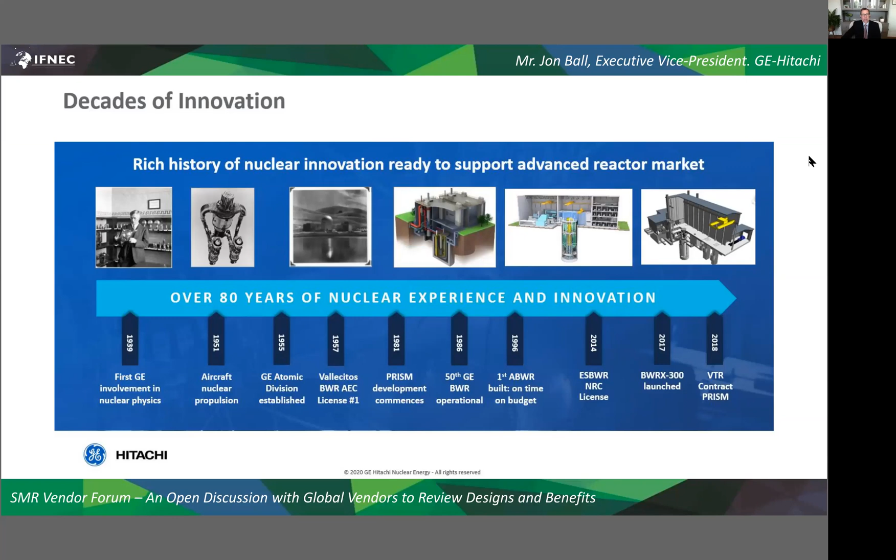Next page, please. So I think many of us on this call can agree that new nuclear is going to be absolutely essential to achieving a world that values decarbonization. More than 60 countries to date have established net zero targets by the year 2050. But the reality is that for nuclear to be relevant going forward, it's an absolute imperative that it become cost competitive. There's been a number of reports recently.

Catapult Energy Systems just last week out of the UK published a report stating that cost reduction is a necessary prerequisite for the future of nuclear. EPRI and MIT have published detailed reports on the same topic. Go to the next page, please.

So it's really out of that spirit of driving cost competitive nuclear that our SMR was born, the BWRX-300. We've established a very rigorous design-to-cost approach, setting aggressive targets to be competitive with all forms of generation, including gas, and really driving for a significant capital cost reduction.

Now, the X300 is our 10th generation boiling water reactor. That's what the X stands for. We've scaled it from our ESBWR design, which is licensed by the US NRC, still maintaining world-class safety. The benefits of smaller reactors like the X300 are their flexibility, the ability to load follow - we've done modeling and it has that capability. Besides providing electricity generation, it's ideal for other industrial applications like desalination and district heating. We've had a lot of focus on constructability, which is key to reducing the overall cost of new nuclear. We've established, and I'll talk more about, licensing in both the US and Canada, with a path towards being operational by the year 2027.

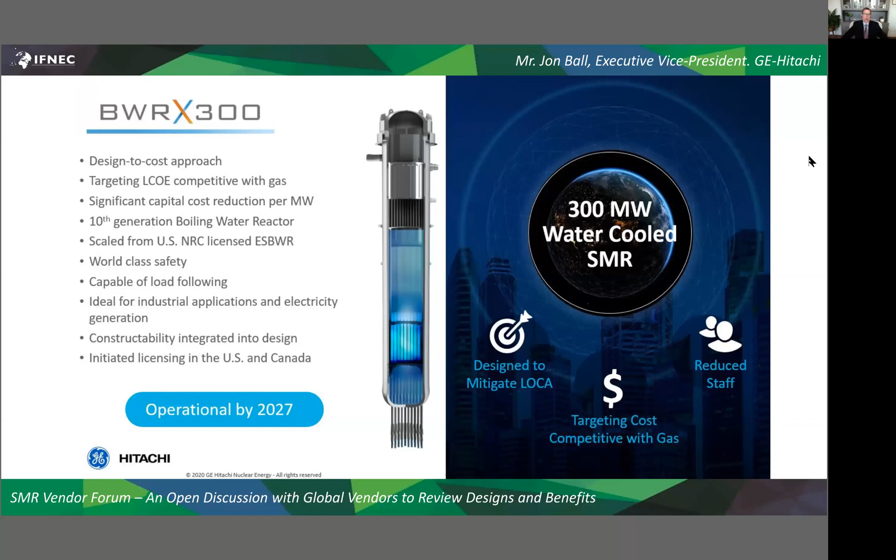So we have these massive safety systems in the event of an accident that we've never experienced. Our engineers figured out a way to eliminate or mitigate the possibility of a large break LOCA. So we were able to eliminate all of those systems and the massive structure that goes with them, reducing the volume of this reactor by 90%, while still maintaining 20% of the output. We get tremendous leverage - more than 50% reduction in building volume, in concrete and steel, on a per megawatt basis.

And we're in the process of licensing this concept. We've submitted an LTR to the NRC, it's going through review, and we anticipate it will be approved in the July timeframe, just next month. Next page, please. So we have these new innovations that have enabled us to simplify the reactor.

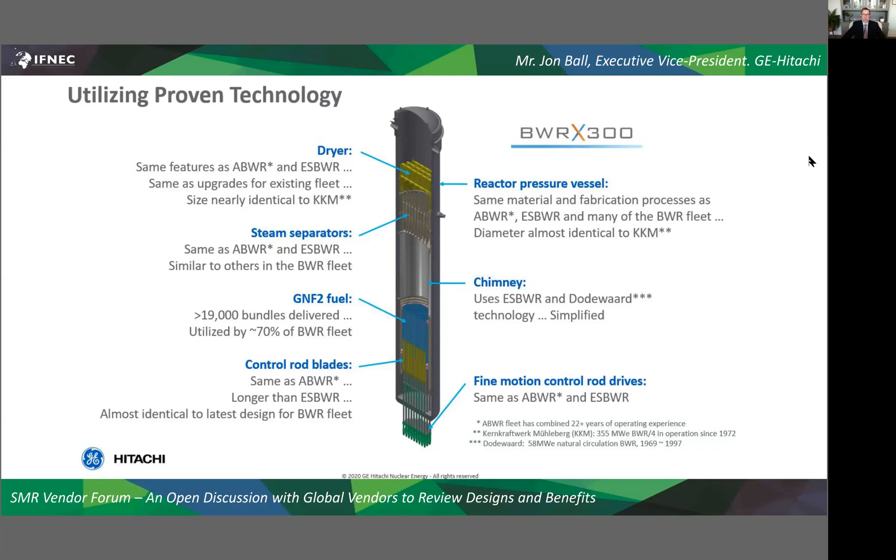In addition, this design leverages existing fuel. It's been optimized on GNF2 fuel, which is operating in 70% of the boiling water reactor fleet today. This enables us to bring this technology to market very rapidly. Our experience is it can take up to a decade to design, license, and deploy new fuel designs. Next page, please.

We have line of sight for this design to be very cost competitive from an nth-of-a-kind perspective. This is a plot of the levelized cost of electricity versus the overnight capital cost for a new reactor. Conventional large light water reactor is very expensive. You can see where the X300 is positioned, $1 billion or less, and somewhere in the 40s dollars on a per megawatt hour basis.

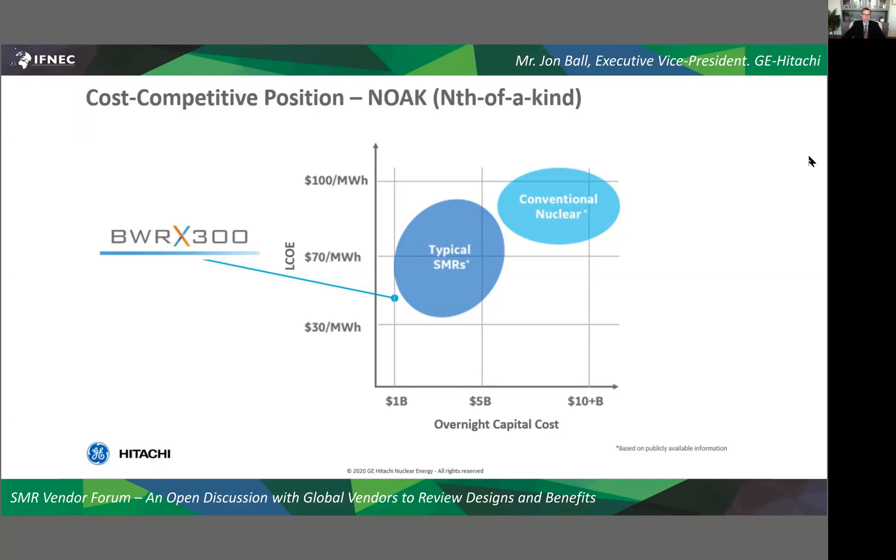Next page, please. We have initiated licensing, as I mentioned, both in Canada and the US. In Canada, we've just started the vendor design review, which is a combined phase 1 and 2 approach. In the US, we've started and we plan on a Part 50 approach, leveraging the ES-BWR design. I mentioned this is already licensed by the NRC. So what we need to do is simply submit licensing topical reports that describe the key differences from ES-BWR going to the X300.

We've started that process. We have a handful of these LTRs. So another example of the ability to really accelerate this technology to market by leveraging ES-BWR. And we target commercial operation by 2027 in the US and 2028 in Canada. Next page, please.

We believe that the US and Canada are going to be first movers, but the rest of the world - and these are just a few examples - we've been in discussions with a number of other companies and countries interested in this technology. We have an MOU with the CEZ Group out of Czech Republic, Synthos out of Poland. This represents a very interesting new customer base. Synthos is a large chemical manufacturer. We believe that the customers in the future for SMRs are not going to be just utilities, but also the industrials, and Synthos represents a great example of that.

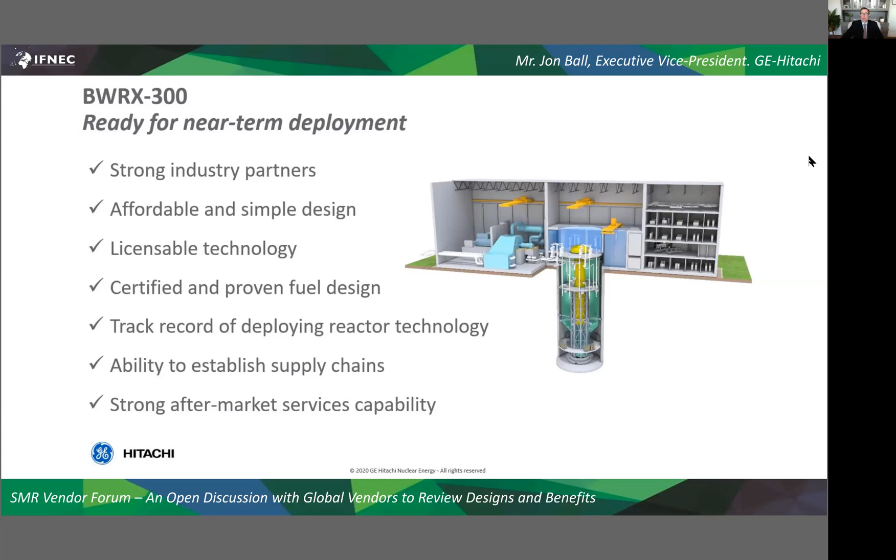Wherever we go around the world, we understand that localized supply chains are critical, and we've done that not only in nuclear, but across the entire GE portfolio. And then the ability to service these reactors once they are online - this is really key in terms of continuing to reduce the operating cost by optimizing outages and those aftermarket areas of support that are so critical. So with that, I want to thank you for the opportunity to be here, and I'm very optimistic about the future of SMRs. Thank you.

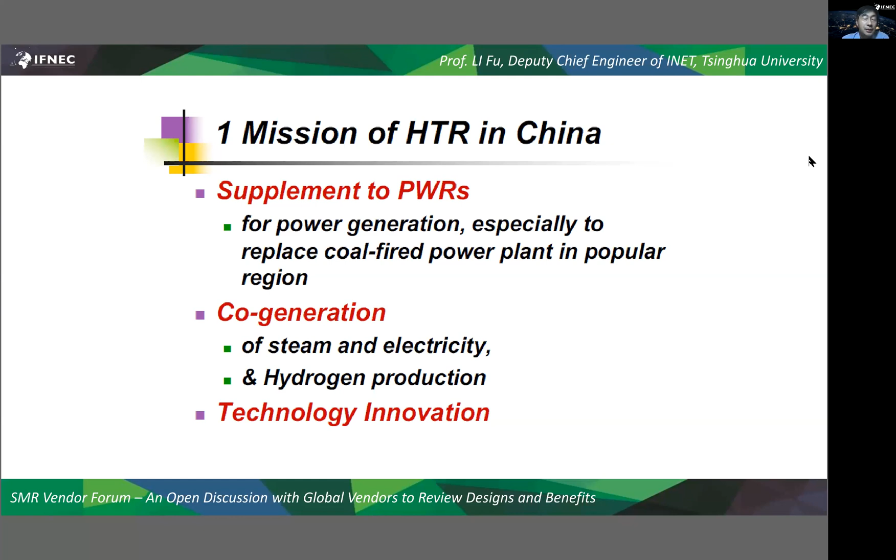In China, we think HTR is very important. It will be a supplement to electric generation for PWR. Its main role is cogeneration, to produce high temperature steam, and maybe in the future for hydrogen production. As an innovative technology, the government will support the commercial development of the project.

In China, we started research on HTR in the 1970s. In the 1980s, we started the test reactor HTR-10, and it finished in 2000. After that, we decided we must build a commercial plant, the HTR-PM.

The HTR-PM started construction in 2012, and we hope next year it will reach grid connection quality. After that, we want to build a larger one—the reactor itself is the same, but each unit will have more modules. A module of the reactor is our aim and our plan. We chose pebble bed, and I think our project also benefits from international cooperation.

For the HTR-PM, it's now under construction in Shandong province. This is Beijing, and it's around 1,000 kilometers from Beijing—that's the site, in Shandong province.

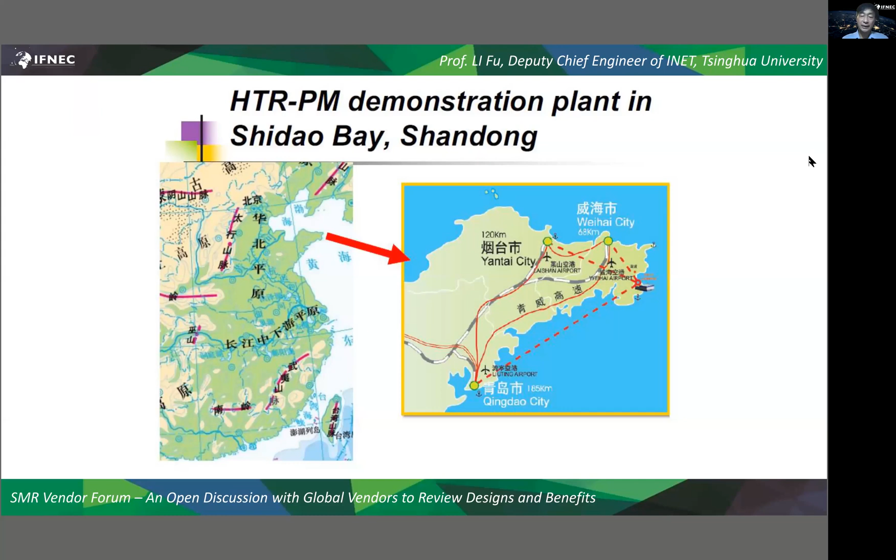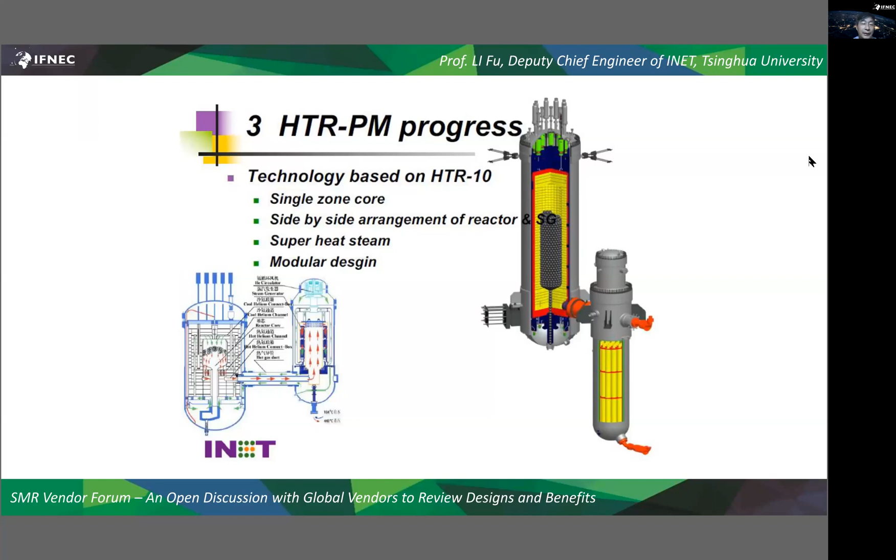A special design feature of HTR-PM is that we have 2 reactors, 2 steam generators, and the steam comes to 1 turbine. In the future, for this configuration, we want to connect 1 steam turbine with 6 reactor modules and 6 steam generators. This way we can keep the main components and steam system, but produce a larger plant with much better economic features—this is our idea.

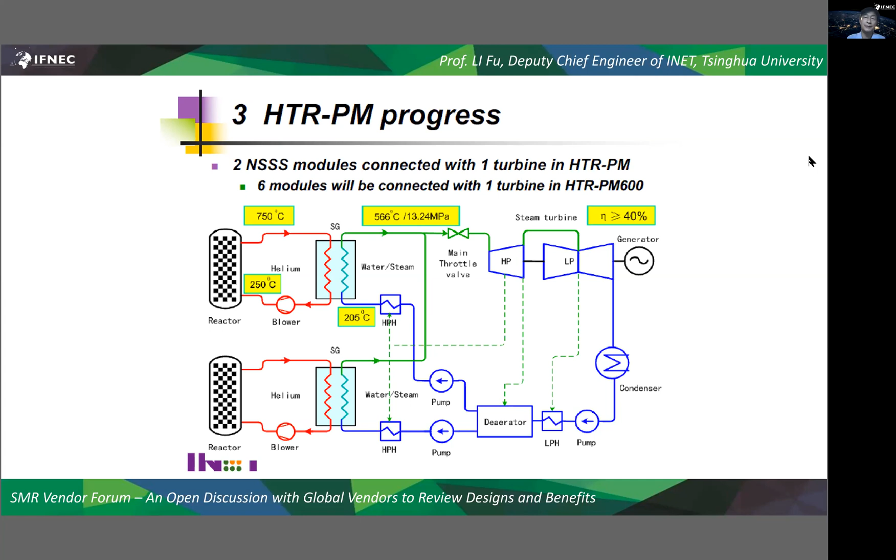Therefore, we will test the coupling between 2 modules in 1 unit in HTR-PM. This will be our idea.

For HTR-PM, we have 2 reactors, each producing 250 megawatts thermal power, and the turbine will produce 200 megawatts, with efficiency around 42%. The steam temperature is around 570 degrees, so we can use a commercial steam turbine with very high efficiency. The helium temperature is around 750 degrees, enough for superheated steam as well. In the future, if we want to produce hydrogen, we can increase the temperature further.

For the project, construction started at the end of 2012. This year, all the installation is nearly finished. The reactor pressure vessel, the hot gas duct vessel, and the steam generator vessel are fixed together. This has taken about 6 to 8 years of installation and construction.

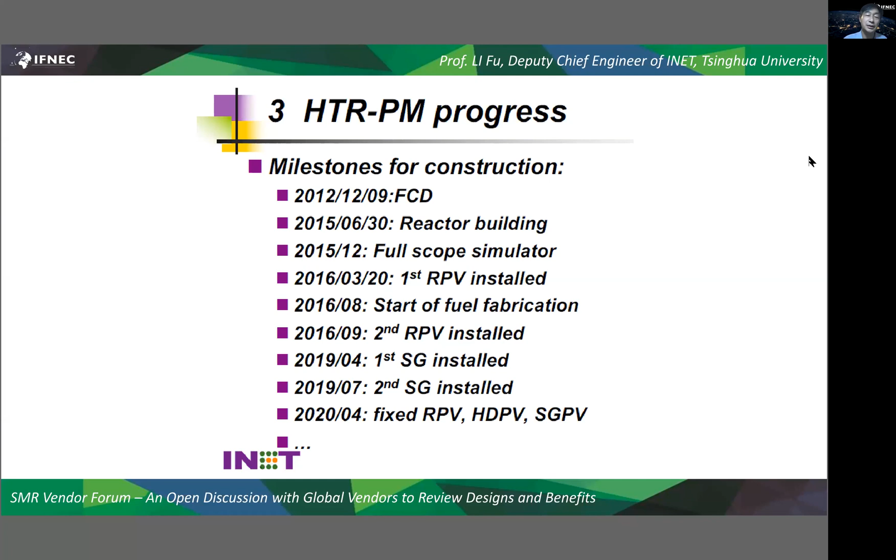It's a first-of-a-kind project, so we encountered many technical issues. In the next project, the construction period is arranged for about 40 months, much shorter than this demonstration plant.

This year, the commissioning test has started, and criticality and power operation are scheduled for next year.

From the project report, I think the main achievement is that we tested the standard nuclear steam supply system modules at full scale, which will be demonstrated in later operation. Our team also gained experience from design, manufacture, licensing, construction, installation, commissioning test, and operation. It's very important to note that the licensing framework for this new type of reactor has gained full experience, and the licensing authority in China is now familiar with this project. Up to now, no technical issue remains outstanding—the remaining work is just to provide experimental data for all the components, which is also important.

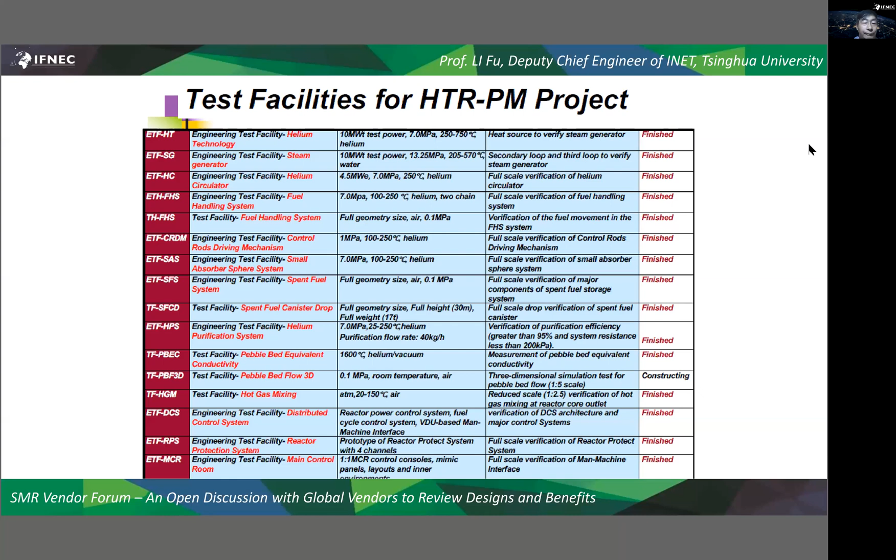All the components were tested. And also for the supply chain, we have very big utility companies, and they are willing to be next utility company. All the main components mostly come from China, from Shanghai Electric for example, and also the graphite comes from a Japan company, Toyo Tanso. And also for the fuel, for the components, for the instrumentation and control, all is coming from China. I think all the system, design, manufacture, construction, and supply chain is available in China and some from worldwide.

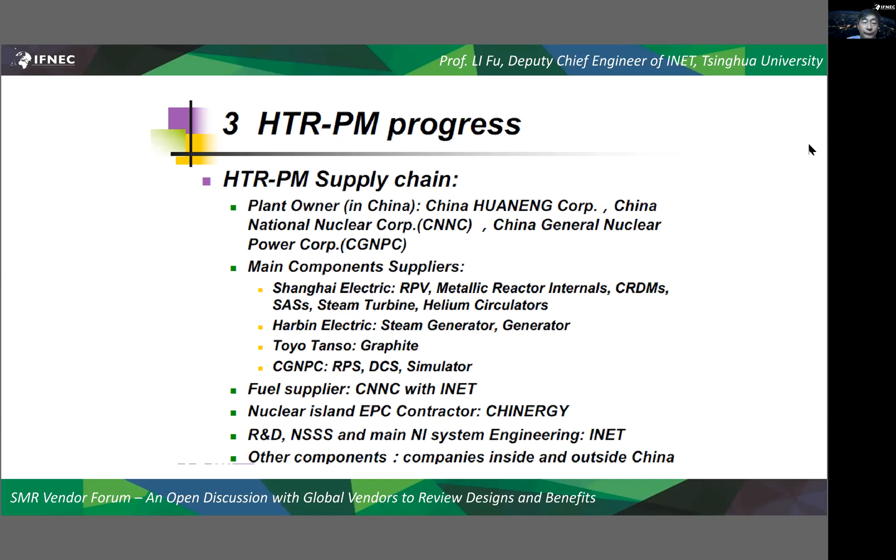After the HTR-PM, I think batch construction of HTR-PM is available. And also we designed a new version, the HTR-PM 600. There are 6 modules instead of 2 modules in the demonstration plant. But all the components are the same, just larger size and better economical. We hope in this way it can compete with other types of nuclear power plant. It can also help to produce steam, which is very important for the market.

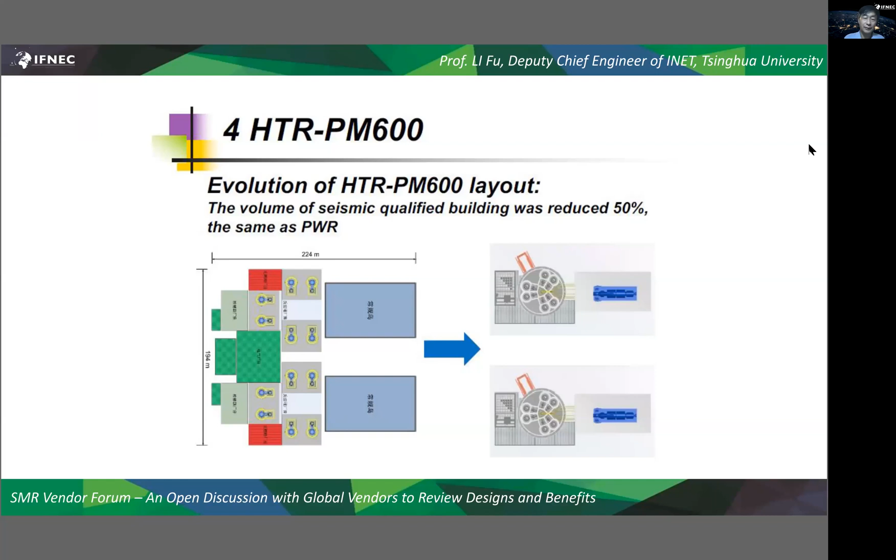This is the reactor building hosting 6 reactors, 6 steam generators located side by a steam turbine. And this is the same space and same area as a light water reactor actually.

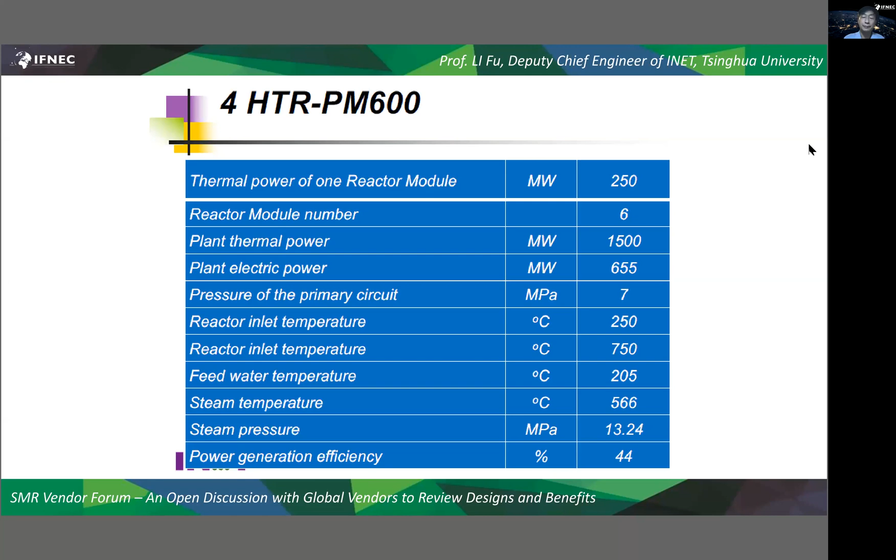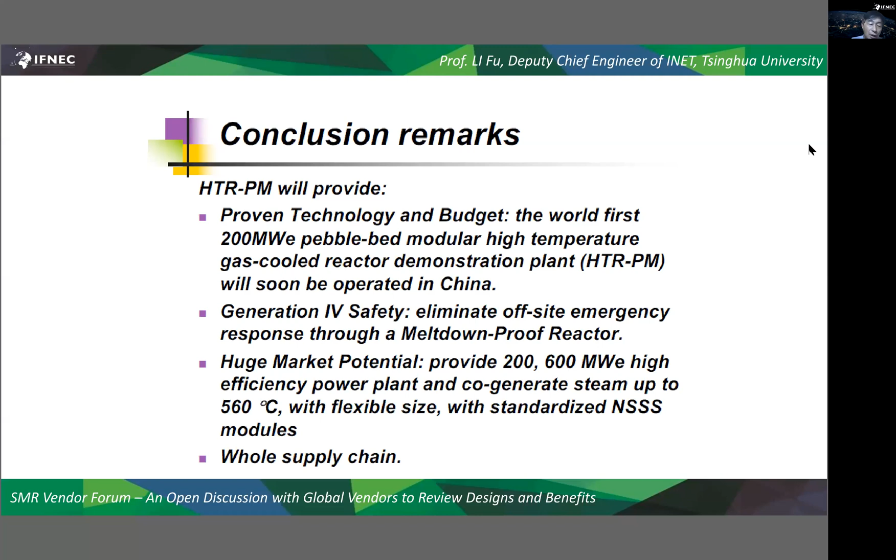I think I can skip this slide, it's a parameter, and I'll conclude. All the parameter is the same. For the HTR project, we can provide a proven technology and the budget of the project. Also the safety feature can meet the Generation 4 category. And also we can provide 200 or 600 of electricity, very flexible, and also steam with temperature around 560 is also available, along with the whole supply chain. Therefore, this is a rare project where all the technology and all the experience is available.

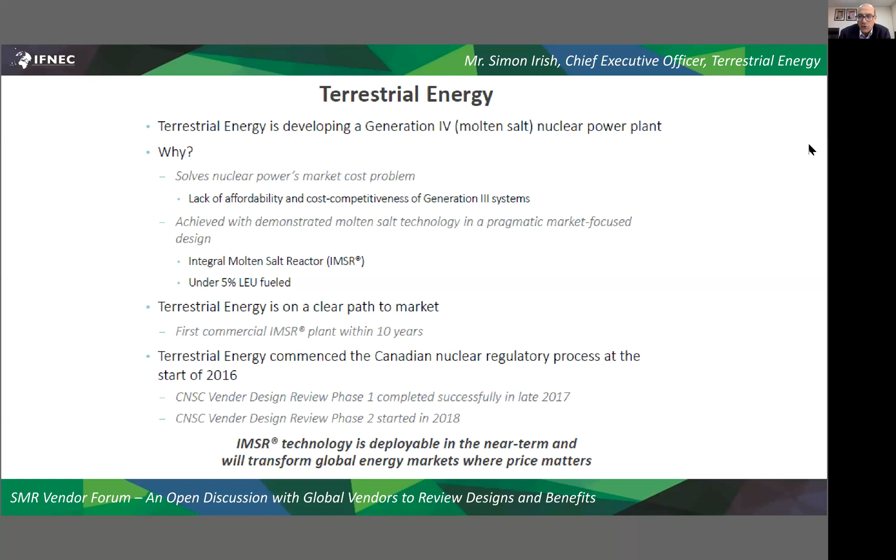Next slide, please. I want to return to the problem statement, the innovation statement. The first three bullet points are self-evident truths recognized by those in the nuclear industry: nuclear energy as an energy source is capable, has always been capable of changing the world, and it will change the world. It's more scalable than fossil fuels, and it's clean.

You have to construct a nuclear power plant, or any infrastructure project, quickly. So, over 10 years to construct, and once you've built it, you can dispatch power at over 10 cents a kilowatt hour. That may be okay for governments doing things not entirely for economic reasons, but that's not acceptable for private capital.

The problem of tens is associated with high complexity. So conventional nuclear new build is too big, too complex, and too costly to build. These, in our opinion, are direct and unavoidable consequences of technology choices. As a company, we formed in 2013 because we believe there's a need to rethink technologies and rethink designs.

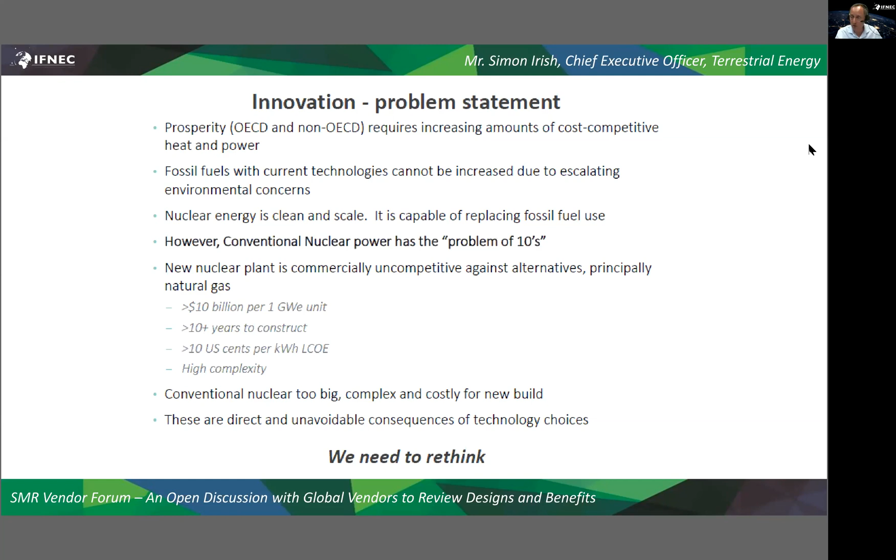These are the cost drivers for Generation 3 small modular reactors, in our opinion. You start off with the cost position of a large conventional reactor and want to make it smaller. You're going the wrong way down an economy of scale, which is ferocious in the nuclear sector, because at every turn, economically, you have fixed costs. Those fixed costs point you always, consistently, to have bigger and bigger systems or deploy more and more of them. That's a negative factor, and it's unavoidable if you wish to have an affordable power plant.

You can, to some extent, offset that by making it modular, assuming broad market deployment. But in our opinion, modularity and mass construction of components in a factory setting is only going to partially offset the diseconomies accrued from making it small. So we don't believe that a small modular reactor using conventional reactor technologies solves the market problem.

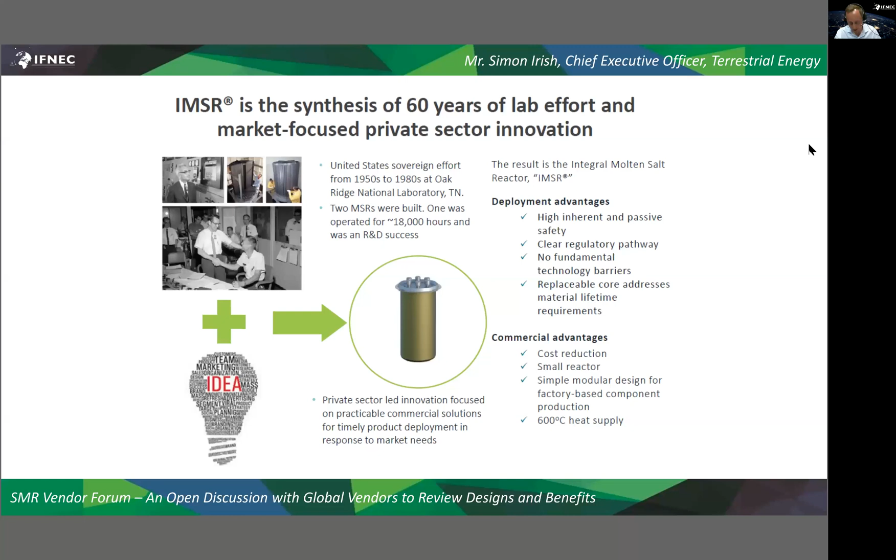Next slide, please. So these are the cost drivers with using a demonstrated molten salt reactor in a pragmatic market-focused design. You'll notice they're more extensive with the generation 4 technology.

The first one I'll talk about in some detail is high temperature. That is the most powerful. The benefit of operating at high temperature is you have a machine that operates at 50% greater thermal efficiency. With 50% greater thermal efficiency, you have 50% greater capital efficiency, and that points very clearly to the opportunity to solve the problem statement.

With a thermally stable molten salt, you operate at low pressure, and with a liquid fuel, you can incorporate to the greatest possible extent the great virtues of inherent and passive safety.

Next slide, please. So this is where we sit in our economic environment. We believe that our technology is capable of dispatching at $50 a megawatt hour, which is competitive against alternatives. Perhaps not natural gas at the moment in North America, but certainly competitive against natural gas on a global basis.

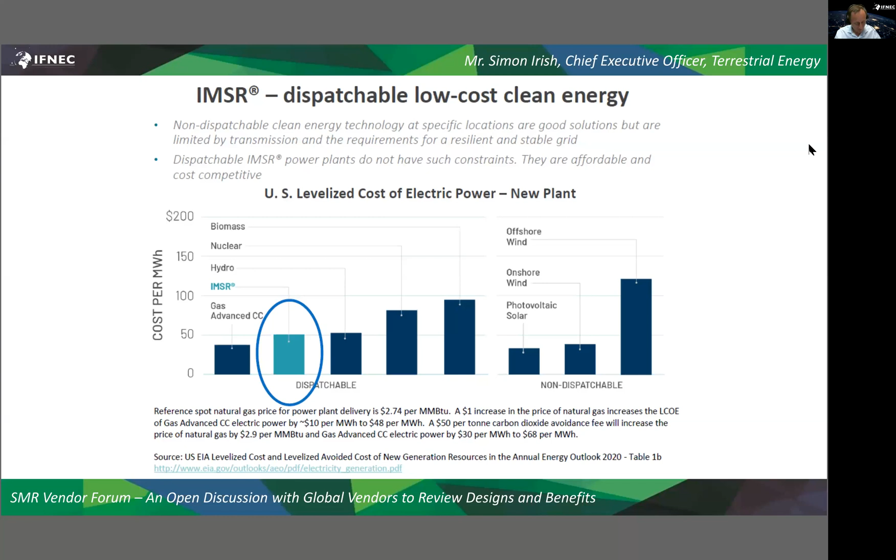Next slide, please. If you are able to deliver on price, the market opportunity is tremendous. The deployment opportunity is first the immediate opportunity of replacing an aging fleet in the West. A further deployment opportunity, which is immense, is replacing coal and natural gas globally.

But let's not, as an industry, forget the big picture, and in doing so, lack ambition. Wind, solar and biofuels are currently attracting $300 billion a year in infrastructure capital. To put that into context, I think the largest order book is Rosatom's, and between now and 2040, that's about $300 billion. The total installed generation capacity of wind, solar and biofuels is 2,500 gigawatts, half of which was deployed in the last 10 years.

Price drives deployment, and if you can engage with private infrastructure capital based on price, there is an opportunity for nuclear which is larger than the opportunity experienced by wind, solar and biofuels over the last 10 years.

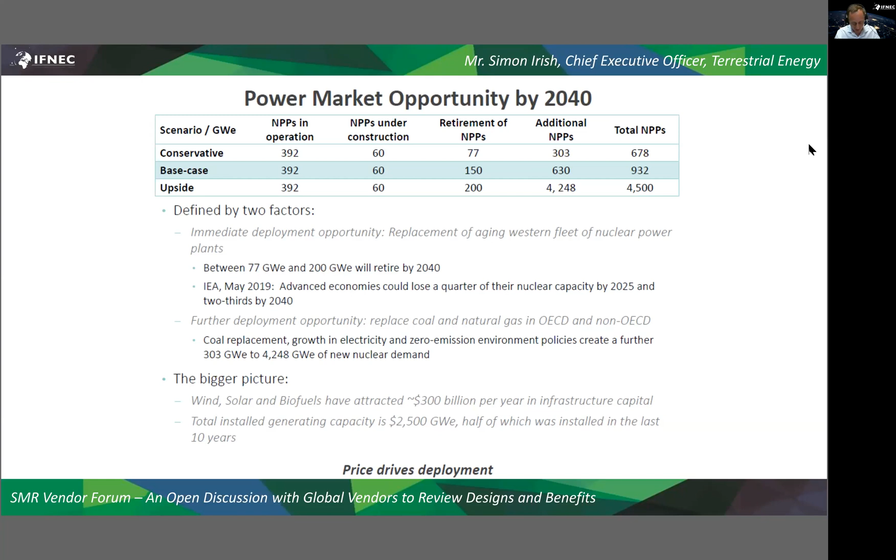Last slide, please. This is our path to market. The path to market is deployment of the first system operating commercial plant by the end of 2028. We are in the process of doing that with a mature engagement with the Canadian regulator, with our supply chain partners and with our utility partners. That is our path to market.

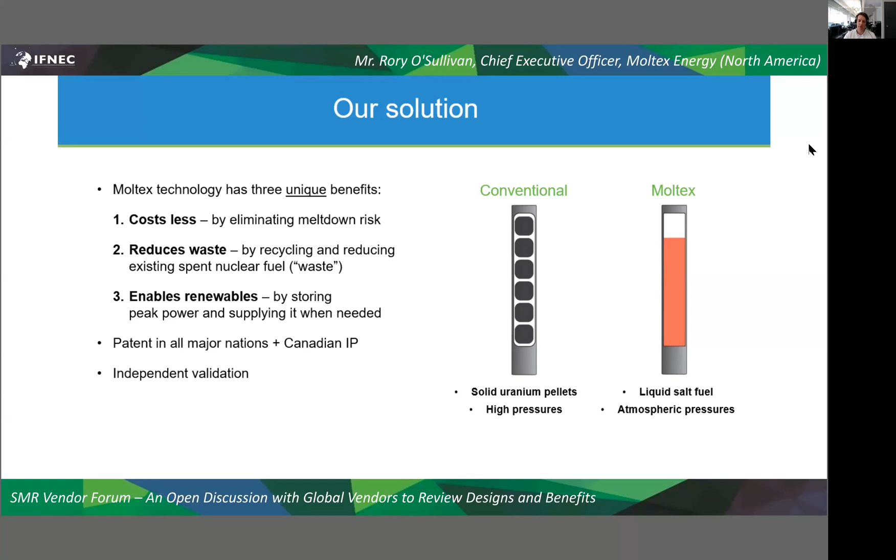Coming back to one of the three unique points, the ability to complement renewables. On the image here, you can see we're looking at a 300 megawatt reactor we've designed that produces baseload heat all the time, 24/7. But we couple that with energy storage from the solar industry, concentrated solar power to be precise. These two combined allow for a peaking plant at a much higher capacity. For example, if we have a 300 megawatt reactor, like we're talking about building in eastern Canada, we can couple that with energy storage for 8 hours, so we can run a 900 megawatt power plant for 8 hours a day. You could have any amount of storage or capacity you want, but the ability to work with renewables really changes what nuclear can do for a more flexible grid in the future.

The cost when you do this for a larger plant can come down as low as $1,000 a kilowatt, comparative to gas and capital cost. But when you compare the storage cost alone, if you look at a comparison to Tesla, we're about 8 times cheaper for the storage part rather than electric storage. So storing heat is much cheaper than storing electricity.

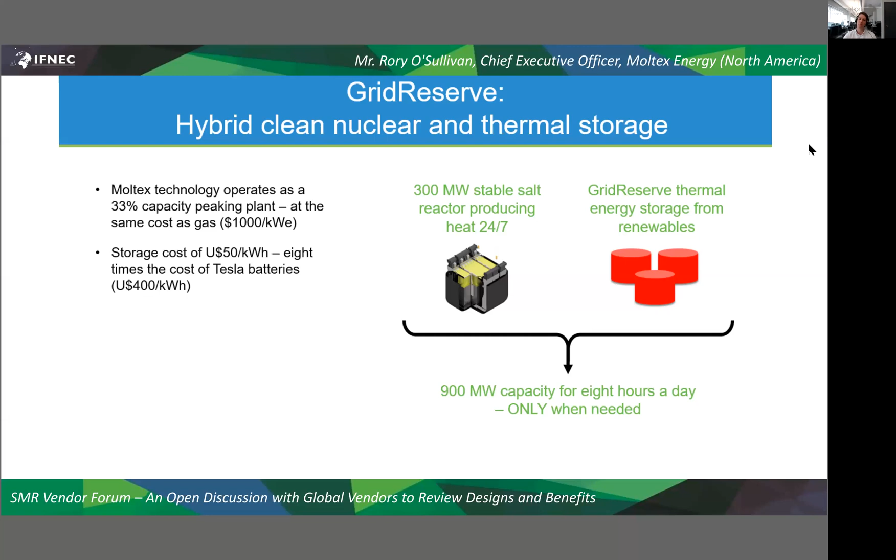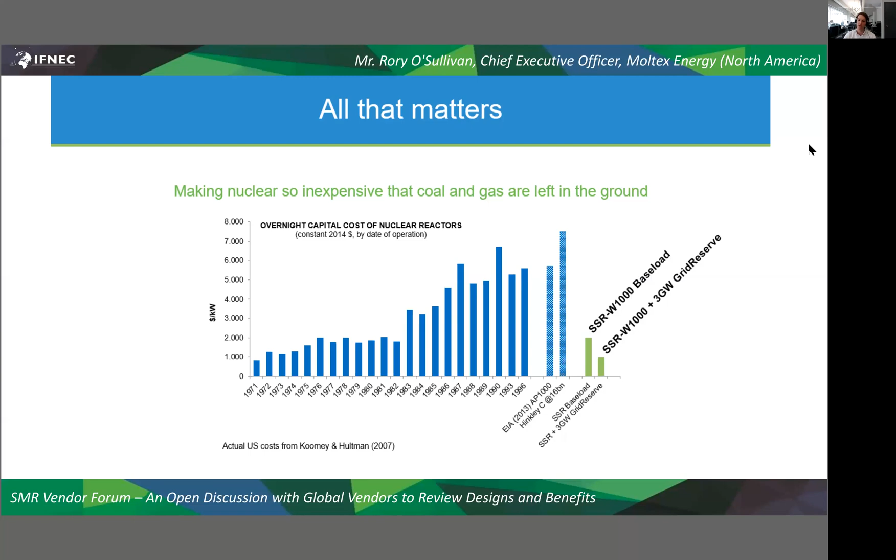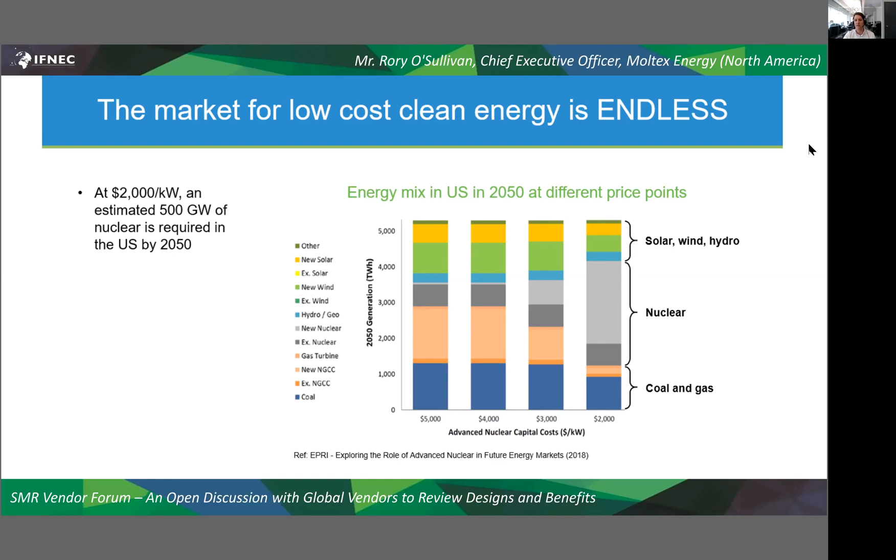And the US doesn't even need new capacity, they're replacing old capacity. So if you replicate this across the world, where we need to double the capacity of energy by that timeframe approximately, the opportunity for nuclear, if you can get the economics right, is unfathomably big. Next slide, please.

So what we're doing now to demonstrate this technology is we have a customer and partner with the New Brunswick Power Utility and the province of New Brunswick on the east coast of Canada. You can see a little map there where our proposed site location is. They're a government-owned utility, the government of New Brunswick. We are progressing through the Canadian regulatory process, the vendor design review, coming to a close of phase 1.

To get confidence on the design, we're doing research and development on our fuel with the University of New Brunswick and Canadian Nuclear Labs to demonstrate the conversion of spent CANDU fuel to our fresh fuel. We have funding from Canadian Nuclear Labs to support that. We've got an office in New Brunswick with a growing team here.

And we've just opened an office in Manchester, UK. We're expanding the UK team there. We're doing parallel research on the fuel with the University of Manchester. We have extensive work across the US labs with funding from the DOE through ARPA-E on a couple of different projects. And at the moment, we're progressing dialogue with the Canadian federal government to get support for the next phase.

Next slide, please. So on the technology itself, I mentioned it's a 300 megawatt reactor. It's the first one we're looking at building in New Brunswick.

And the fuel assemblies itself are quite like a sodium fast reactor. In fact, in section, the reactor looks quite like a sodium fast reactor. It is fast spectrum. The coolant, however, is a fluoride coolant, a mixture of zirconium and potassium fluorides. And the fuel is a mixture of sodium chloride and other actinide trichlorides. We're looking at quite a high burn up, around 100 to 150 gigawatt days per ton, and that's because of the advantages of molten salts.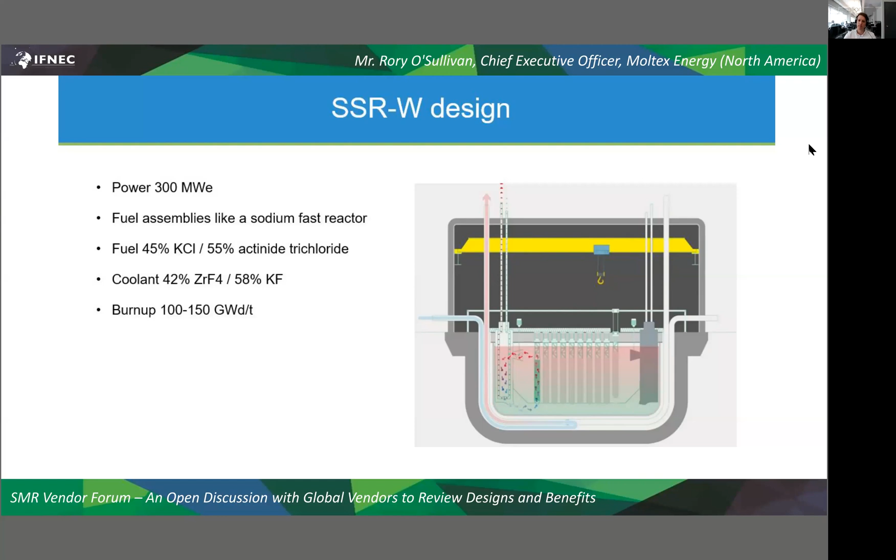Next slide, please. So in terms of operations of the plant, essentially this is not a revolution in terms of staffing requirements. The principles of our staffing are actually quite similar to conventional plants, because we have fuel facilities on the same site. So we'll be looking at siting these adjacent to existing light water reactors to use the spent fuel from those facilities. So we have reduced staffing, but the same types of staffing.

Typically, there'll be extensive IAEA involvement because we will be dealing with spent fuel, but there will be efficiencies because you'll typically be working adjacent to an existing facility. Next slide, please.

So overall, we expect our reactor technology to cost significantly less than existing nuclear options. We can reduce the legacy waste that will open up the social license to nuclear in new builds. And that's why we've taken this decision first to go with a harder reactor configuration using spent fuel, because if you can deal with spent fuel and get the cost right for nuclear, nuclear becomes an option again. And of course, renewables will grow, so we need to be able to mix with that.

We're working in New Brunswick, the UK and the US, developing teams in all 3 countries. And we believe that new nuclear can play a significant role in economic recovery post-COVID. Thank you very much.

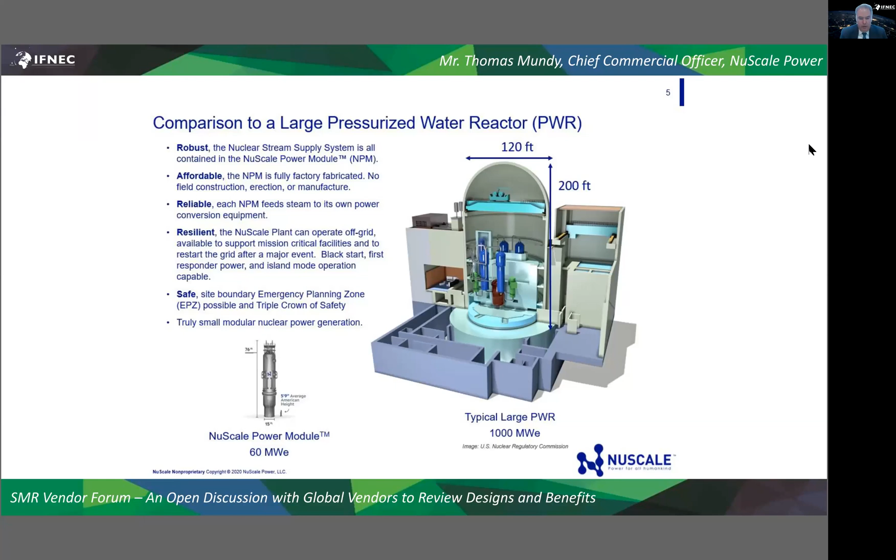I'll give you some perspective of where the power module resides with respect to the overall facility. The modules themselves sit in their individual bay, in what amounts to the ultimate heat sink, a large pool of water that provides cooling water in the event that such cooling water is needed.

I note the Triple Crown for nuclear safety. Our design's extremely strong safety case results in an indefinite, unlimited coping period in the event that the station loses all power. All the reactors are automatically shut down and will cool for an indefinite period of time without the need for operator action or control system action, no AC or DC power, and no need to add any more water to the pool. That's a first for the nuclear industry, and a first in that we don't need nuclear 1E electric power.

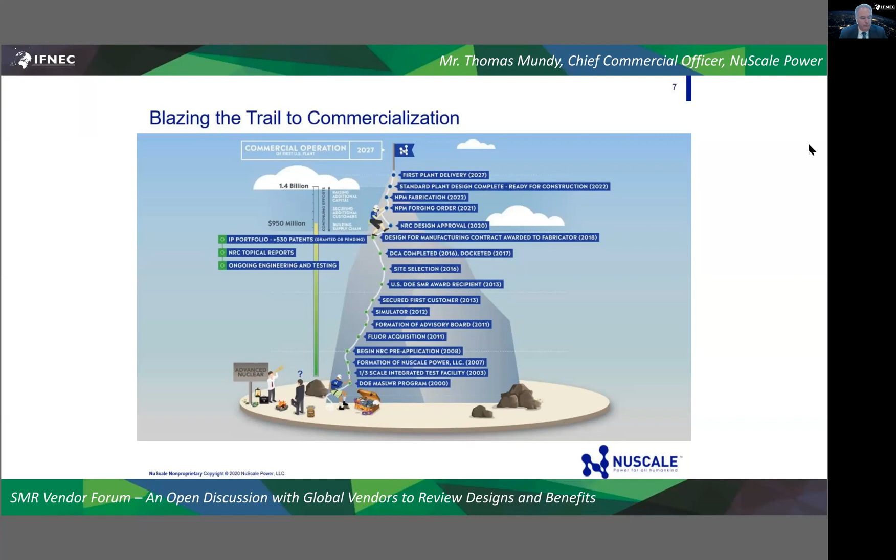The design certification has been going very well since we submitted our application in late 2016. It was docketed in just a couple of months, and review commenced in March. We'll be finishing phase 6, the NRC's issuance of the final safety evaluation report providing design approval of our technology, in just a few months. Then the administrative process of certification will follow next year. What's important is that design approval, since our customers need it to be able to reference an approved design in their own combined operating and construction license applications.

We're also in Canada, in phases 1 and 2 of the Canadian vendor design review process, getting our technology before the Canadian regulator in anticipation of deployment in what appears to be a very promising market for SMR technologies. Move on to slide 9, please.

Always an important consideration is what the facility will cost. We may have been the first SMR technology to produce a very rigorously developed bottoms-up cost estimate that comports to the AACE International regime of cost estimating. We did this first in 2014, updated in 2017.

We're working with our first customer now to develop a Class 3 estimate for the project. Class 3 estimates require bringing project-specific information and costing into a very rigorous review, and it shows that for the Nth-of-a-kind deployments beyond the first one, we're looking at roughly $2.5 billion for 720 megawatts gross of electricity, or roughly $3,600 per kW, a number we think is competitive with gigawatt-sized facilities. Our target levelized cost of energy for that first project, under its financial model assumptions, is $65 per megawatt-hour, also very competitive on a levelized basis.

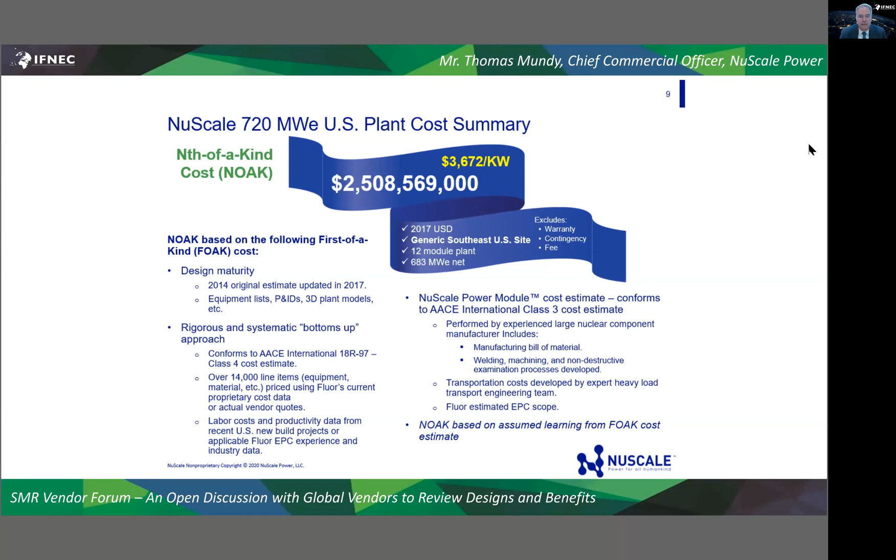I didn't mention that estimate is based upon deploying our facility, our 12-module facility, at a generic greenfield site in the southeastern U.S., using U.S. labor rates, labor productivity, and other costs associated with deploying a facility in the U.S. If the facility were deployed elsewhere, using a different labor pool that may be less costly than a U.S. labor pool, then the price would obviously go down. But those prices are all based on a generic location in the U.S.

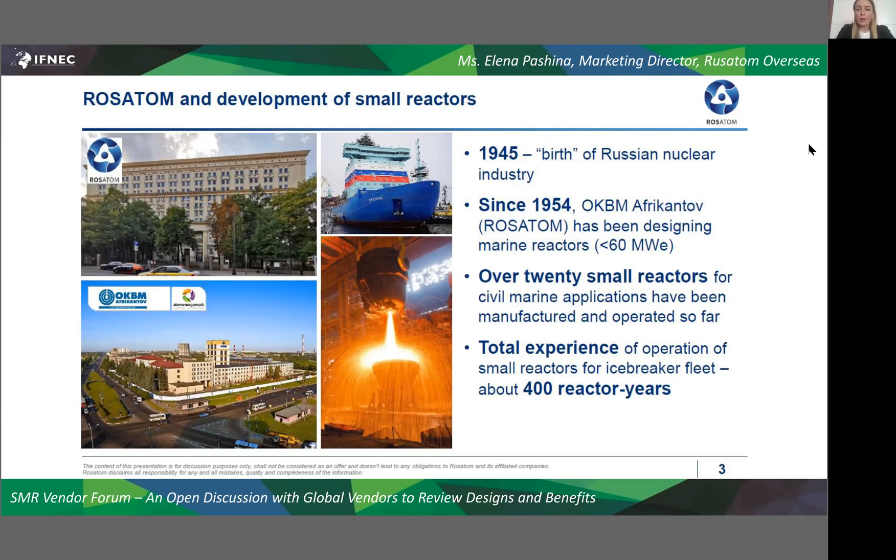Thus, we understand that our experience can meet market requirements, and based on these two important notions, we are moving forward with SMRs.

Based on our experience, you can see the evolution of Rosatom's PWR small modular reactors in this slide. We are proud to say that in May 2020, a month ago, we fully commissioned the first and unique floating nuclear power plant with SMRs. There are two SMRs providing together 77 megawatts electric for the northern part of Russia. It's also important to note these reactors are similar to those used on icebreakers - there are predecessors for the reactors used in this floating nuclear power plant. This floating nuclear power plant with SMRs will enable reliable, safe, and affordable energy supply to key industries in the northern part of Russia, at its location site in Chukotka.

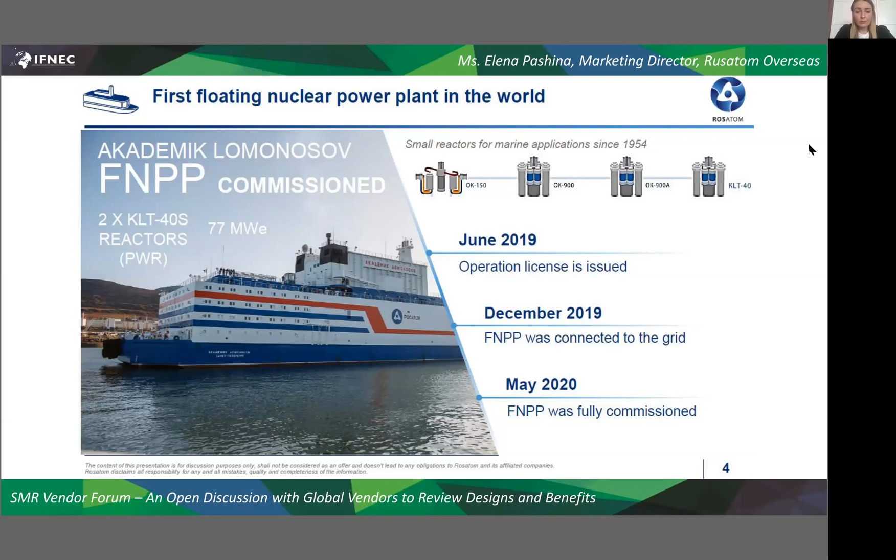Following that experience, we are now introducing the flagship SMR, the Rosatom RITM series SMR, which incorporates all the best features of its predecessors, including the KLT-40 reactors installed at the unique floating nuclear power plant. We can say this RITM series SMR is based on proven pressurized water reactor technology that has demonstrated its efficiency and ultimate safety throughout the stages of the life cycle.

It has an integral configuration with steam generators incorporated into the reactor vessel. Its compact design has made it possible to reduce dimensions by 45% compared to KLT-40S, and to reduce mass by 35%. The total weight of the assembled RITM series SMR is 244.5 tons. The heaviest component is the reactor vessel, weighing 146 tons.

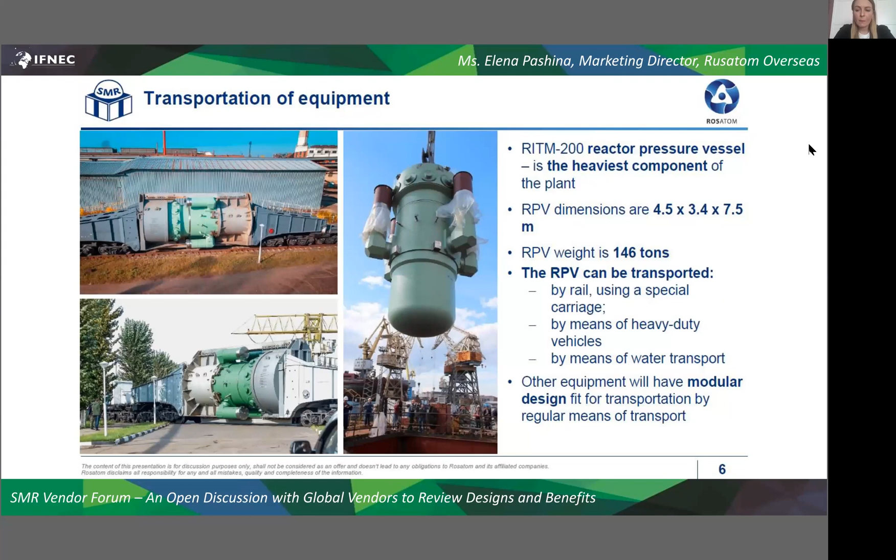The electric capacity of a RITM series SMR is around 50 megawatts electric. Importantly, 6 RITM series SMRs were already manufactured and installed on icebreakers, and 2 of them reached criticality in November 2019, last year. This means the reactor technology itself is already referenced and proven - we can say we have a sufficient market for RITM series SMRs in the country to be able to offer the international market a tested, tried, referenced, and proven reactor solution.

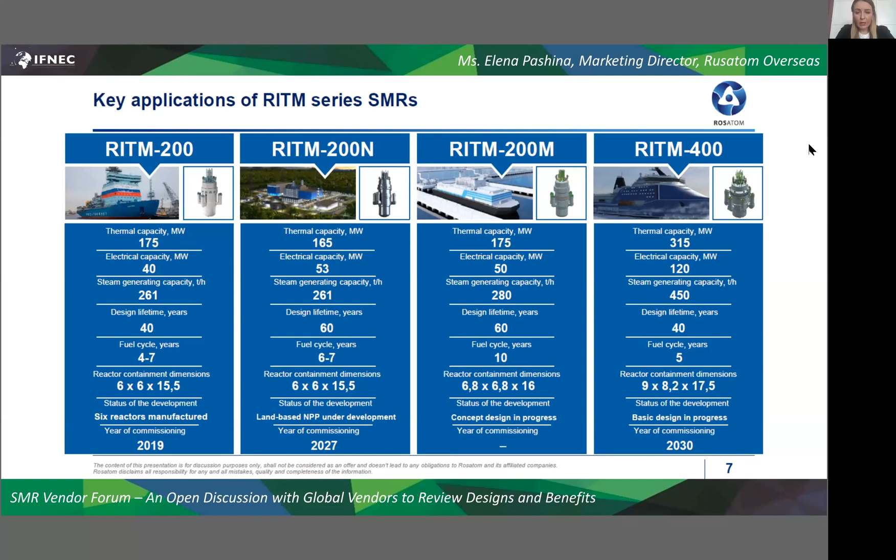Now let's move to the next slide and take a deeper dive into the land-based nuclear power plant with RITM series SMRs. Its installed electrical capacity is 106 megawatts, with 2 RITM series reactors in it.

Design lifetime is 60 years, with a refueling cycle of up to 7 years. The capacity factor will exceed 90% during the whole 60-year design lifetime.

Speaking about construction time, we expect it to be 4 years for the first of a kind in Russia, and we hope to decrease it to 3 years for the Nth of a kind.

It can be used for multiple applications. We mentioned water desalination, cogeneration opportunities, and hydrogen production. Due to the relatively small installed capacity and maneuverability, it is quite easily compatible with electrical grids.

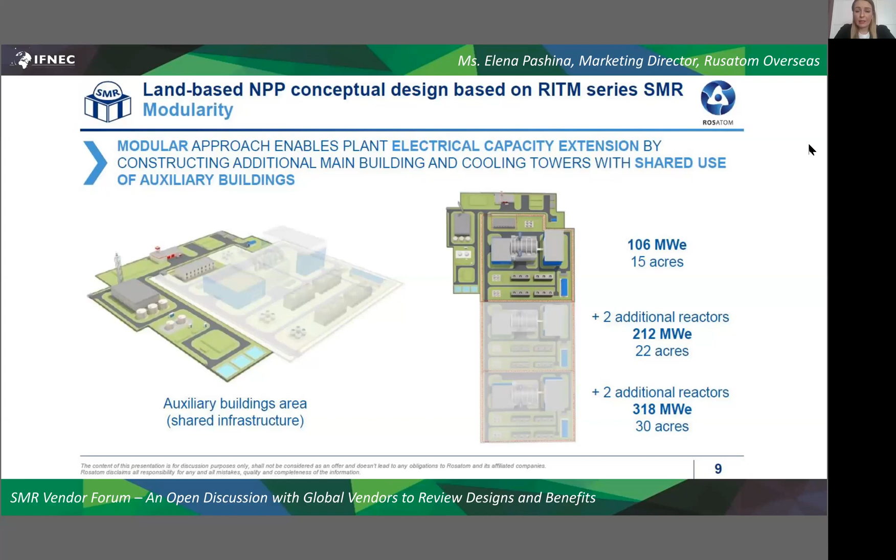Next slide, please. Actually, it is important to— yeah, I see I have about 2 minutes. You have 2 minutes. Yeah.

Having a deeper dive into the reactor itself, as I mentioned, it's an integral configuration with passive and active safety systems.

We have 4 main circulation pumps. The core has 199 fuel assemblies. And still, since it's an integral design, the steam generators are incorporated into the reactor pressure vessel.

Okay, I don't think I need to stop here deeper. Next slide then, please.

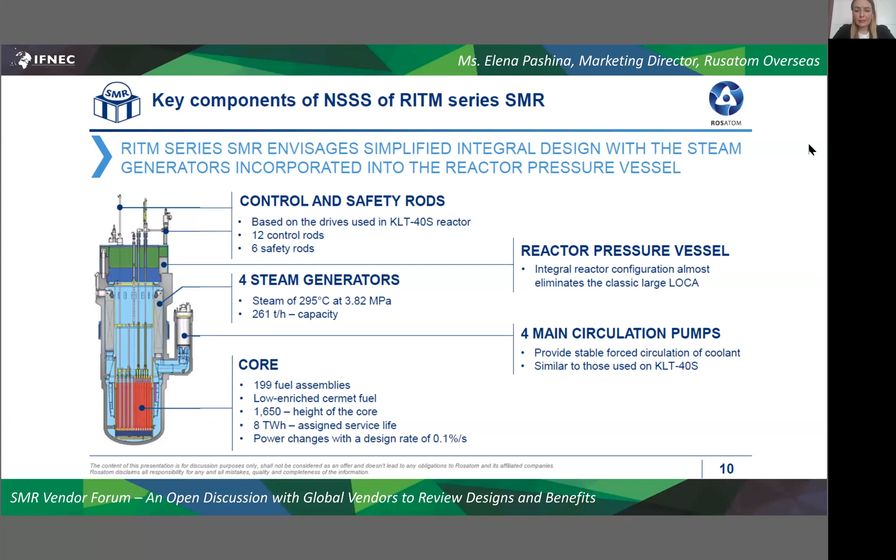A little bit about the safety concept: the reactor has inherent safety features, passive and active safety systems, physical barriers, and beyond design basis accident management. So the defense-in-depth principle is fully considered here. The integral design configuration almost eliminates the classic large loss of coolant accident.

Next slide, I think.

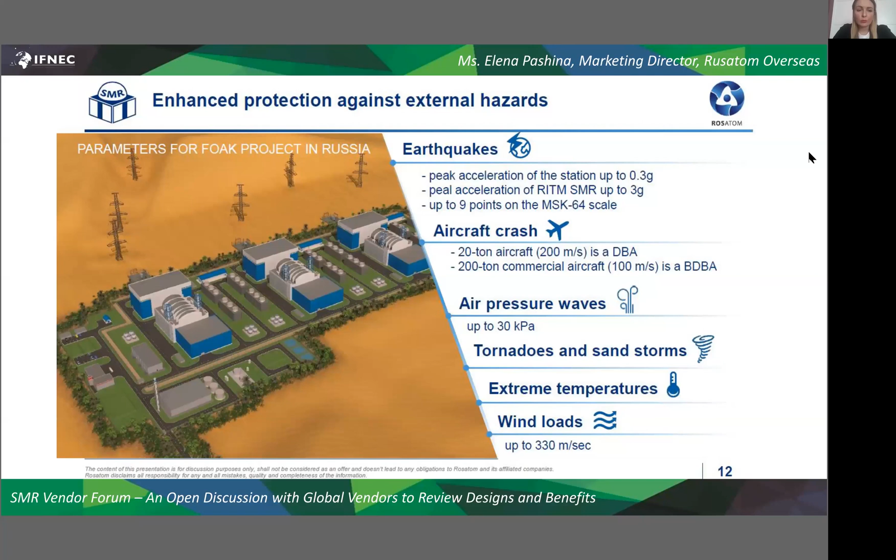Next slide, please. Just a little bit about the first-of-a-kind project in Russia: licensing, definitely.

As I mentioned, 6 such reactors have already been manufactured, and we don't have a special process for reactor licensing in Russia because we have a different licensing system. So our next step for the first-of-a-kind SMR NPP in Russia is getting the site license, which we plan to obtain in 2023, and to commission the nuclear power plant in 2027. It's shown on the next slide, please.

So the site license is planned to be obtained in 2023, the construction license in 2024, and commissioning is planned for 2027. Next slide, please.

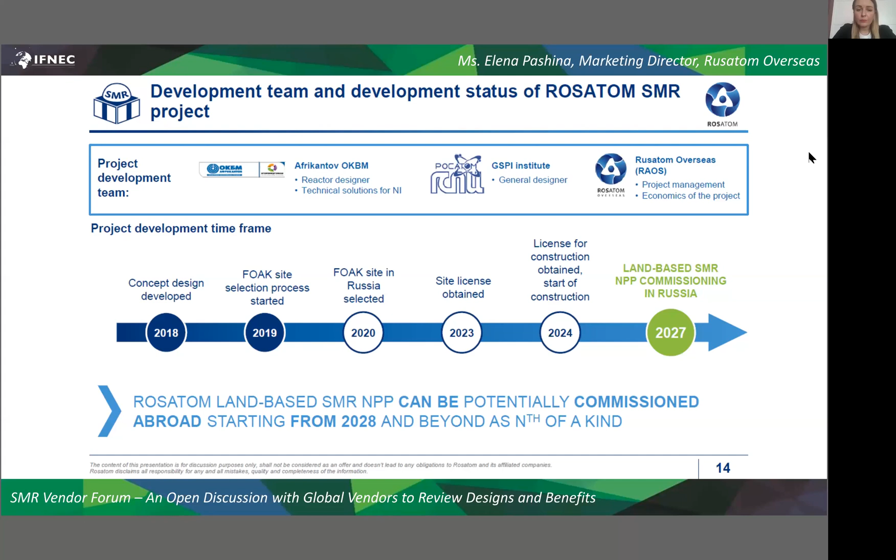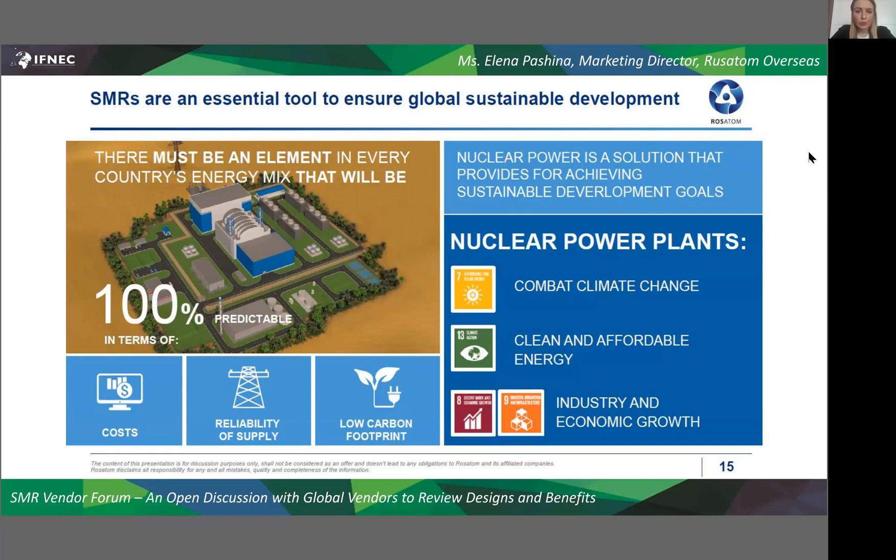Just two ideas about sustainability: we take an active role in working groups globally to assess how SMR projects will affect the sustainable development of countries, and we have developed a methodology for calculating these positive effects. We'll be happy to join hands with global vendors to assess the effects of these projects' implementation in host countries. Thank you, I'll be ready to answer questions.

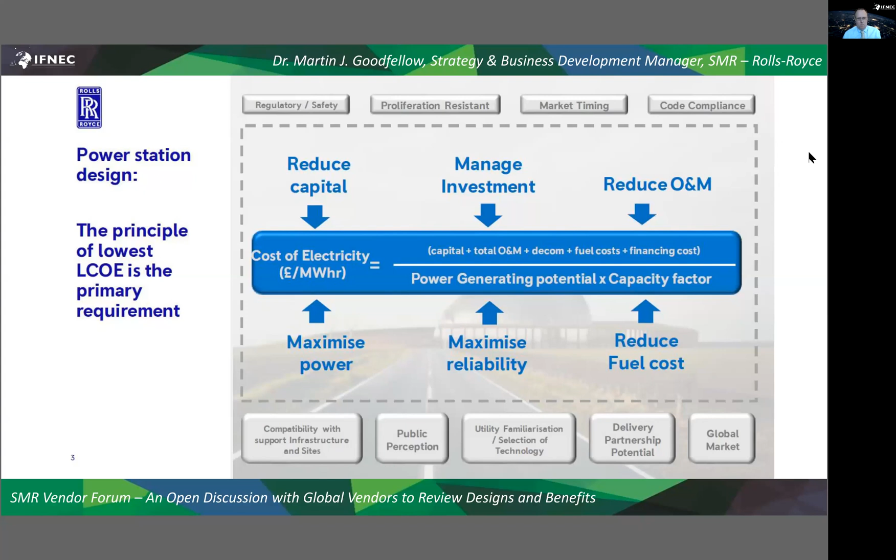And actually being down at that sort of £40 a megawatt hour region, certainly for a UK-based plant with a UK-based development cycle, is where you really need to be. And essentially our projections, our estimates so far place us in the 40 to 60 region, which means that we are competitive in that UK landscape. Similar disclaimer to some of the other speakers so far, that's UK figures with a UK-based engineering approach, a UK operation, UK licensing, UK regulation. As you move around the world, those figures change, and indeed, actually, there may be regions where we're able to do better than that. But it's really that fundamental, holistic understanding of each of those aspects and how the design of the power station affects each of those aspects. That's something that we integrate, perhaps in a way that I've not seen from others so far.

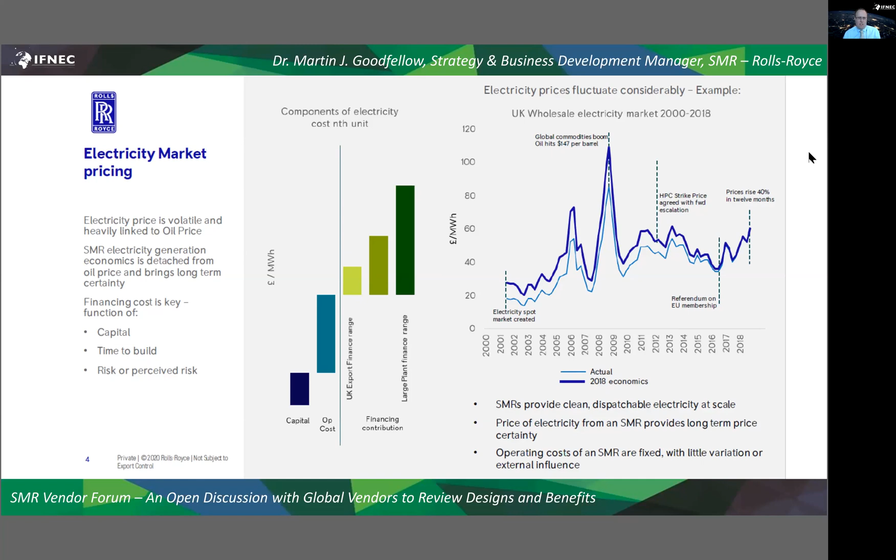It's about maximizing the power output from the asset for that capital cost. Our capital cost is around £1.75 billion for the Nth-of-a-kind unit. That delivers down to about £40 a megawatt hour with appropriate financing. We look at the whole life cycle, using a tried and tested fuel form which integrates with current fuel fabrication facilities.

The standardized approach we take with an aseismic bearing and a seismic raft allows us to place those standardized products, those standardized modules, on top of that raft wherever we are in the world. So we gain the flexibility of effectively any site anywhere within the bounds of the design basis around things like seismicity, but we gain the advantages of offsite manufacturing and that controlled environment.

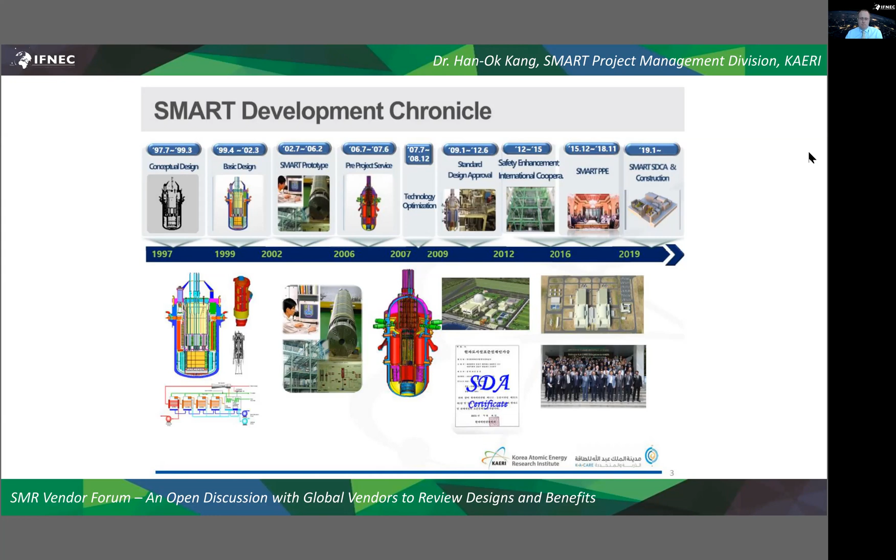Since 1997, Korea and Korean nuclear industry have been developing small modular reactor, the SMART technology, together. In the early development stage, we focused on reactor and safety system, integral reactor design development. Afterward, whole plant design was done for standard design approval from 2009 to 2012. Korea and Saudi Arabia launched a 3-year first kind of engineering design project for construction of two SMART units in Saudi Arabia.

In 2015, Korea and Saudi Arabia signed a Memorandum of Understanding for a SMART Partnership Cooperation. To reach agreement, the two countries performed a joint feasibility study for SMART deployment and identified mutually beneficial cooperation. This form of cooperation is not a typical seller and buyer cooperation. The two countries are partners. We jointly developed the technology and shared ownership of SMART technology, and now we are trying to promote the SMART technology globally together.

SMART Pre-Project Engineering Project is the first phase of the SMART partnership between two countries. The purpose of this project is to design SMART to build two units at a specific onshore site of Saudi Arabia. Work scope includes reactor system, fuel, balance of plant, and main component design validation. Finally, we generated a preliminary safety analysis report for the licensing procedure. This project also includes a human capacity building program for Saudi Arabia engineers that includes CRT-Basic, CRT-Technical, and on-the-job training and participation. Also, major nuclear industry players including KEPCO E&C, KEPCO NF, and Doosan Heavy Industry participate in this SMART project for their expertise.

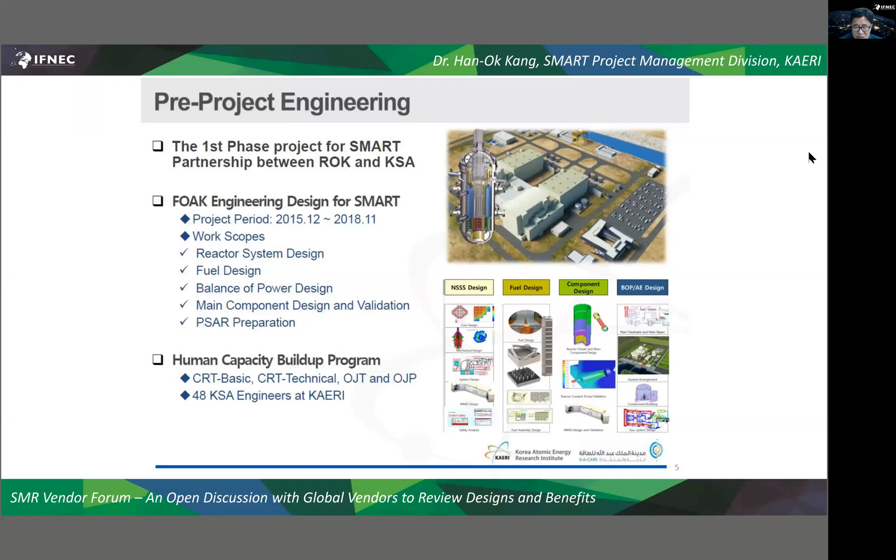SMART is an integral reactor, where the major components of the reactor system, like core, steam generator, pressurizer, and pump, are located inside the reactor vessel. There is no penetration through the reactor vessel. Only small penetrations less than 2 inches are allowed, above the top of the steam generator. By doing this, we can limit the break flow through the reactor vessel. Reactor coolant pumps are canned motor pumps and horizontally mounted above the steam generator. We are using a helical steam generator and produce superheated steam. A special device, some inlet orifices, are used to prevent unstable oscillation of the steam generator. We are using 57 conventional fuel assemblies with UO2 ceramic fuel.

All the safety systems of SMART operate in such a way that operator action or electrical power are not necessary for SMART safety function during a design basis accident. Typical safety systems of SMART include safety injection system, heat removal system, and containment cooling system. All these systems operate on the basis of natural force, like gravity and pressure difference, and water for radioactivity suppression, scrubbing. Therefore, the safety system can operate without depending on electric power from emergency diesel generators. But we are using some safety grade batteries to provide necessary DC power for valve initiation and post-accident monitoring.

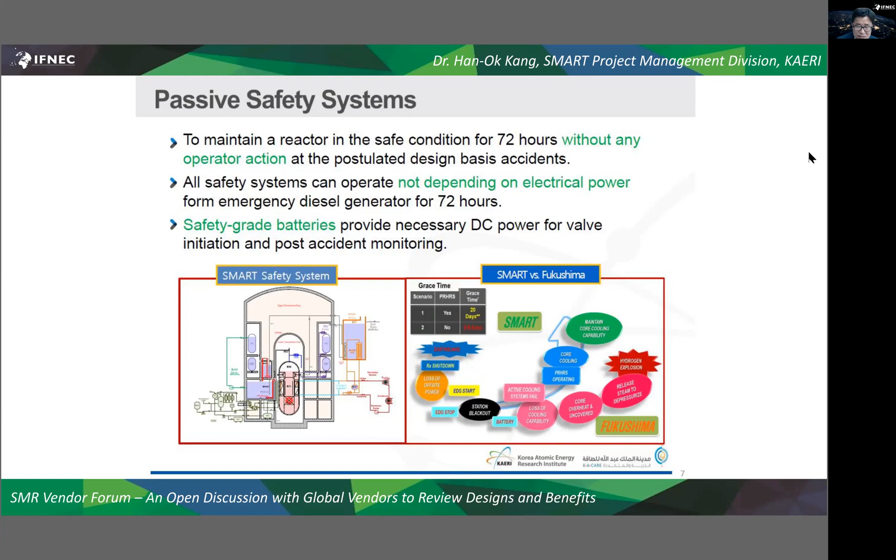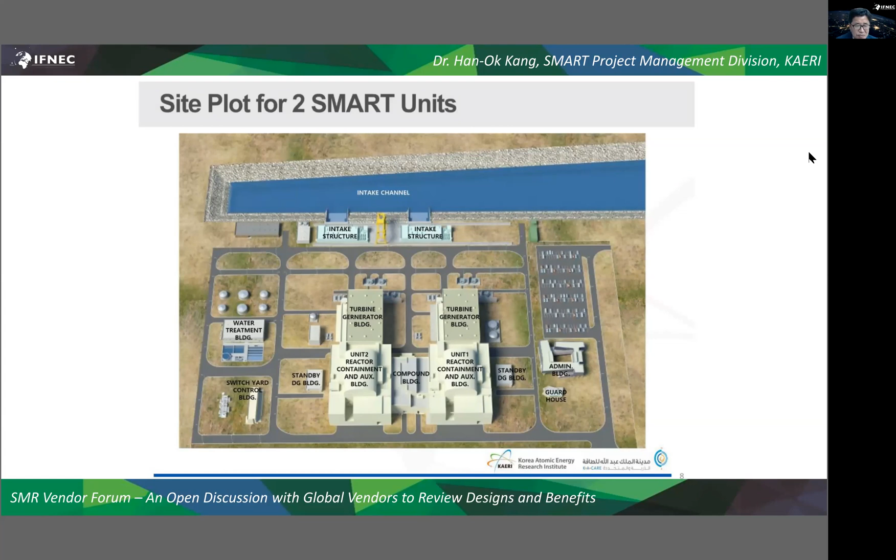We did a lot of tests, but I'll show here a typical representative test facility for SMART ITL, SMART MCR, and SMART fuel. SMART ITL is the integrated thermal hydraulic test facility for SMART, and this facility simulates the reactor system, passive system, and balance of plant. Height is a very important scale to preserve natural phenomena of the passive safety system, so we preserved the original height of the SMART passive system in this facility.

SMART main control room was also constructed to generate licensing data for human factor engineering and emergency operating guides. SMART MCR utilizes a large display and sophisticated alarm reduction technology. We are also using elastic tile-based alarm display, which provides faster and easier plant status awareness.

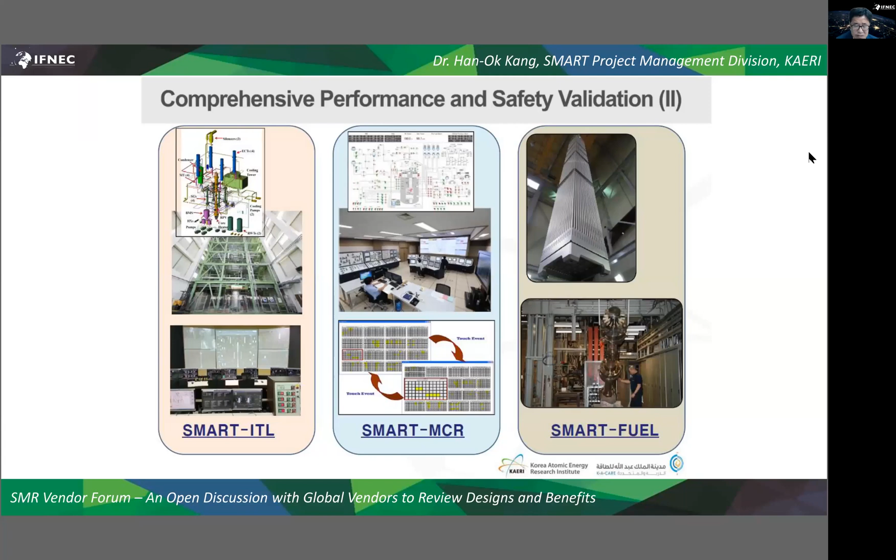During our SMART pre-project engineering project, there were some design changes, including power uprating and fully passive system introduction, for better economics and safety. Considering this design change, KAERI, K.A.CARE, and KHNP applied a new standard design approval for SMART, which we call SMART 100, last December. SMART SDA will enter the regular technical review phase after the compliance review phase is completed. We expect the final safety evaluation report will be issued by the end of next year.

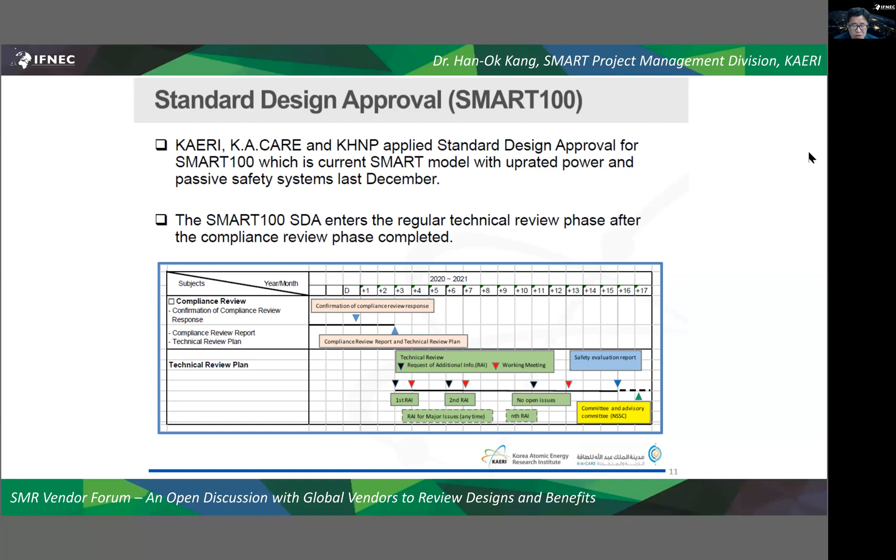Now I'm talking about the SMART business model. KAERI and K.A.CARE are joint SMART technology owners. Also, recently KHNP, with a lot of experience in large nuclear power plants in Korea and UAE, began to play a role as EPC for global SMART commercialization. The SMART team, consisting of KAERI, K.A.CARE, and KHNP, is the best combination for SMART development, deployment, and global commercialization.

So I'd like to summarize my presentation. SMART can be utilized for various applications, including electricity generation, desalination, and process heat supply, including hydrogen generation and mining procedures. SMART design is a mixture of innovative concept and proven technology for licensing and market accessibility. New technologies were proven through a comprehensive technology validation program.

Korea and Saudi Arabia jointly have ownership of SMART technology and cooperate for global commercialization. The two countries are ready to cooperate with newcomer countries to deploy SMART technology. Thank you so much for your attention, and please stay healthy and strong with your family and loved ones.

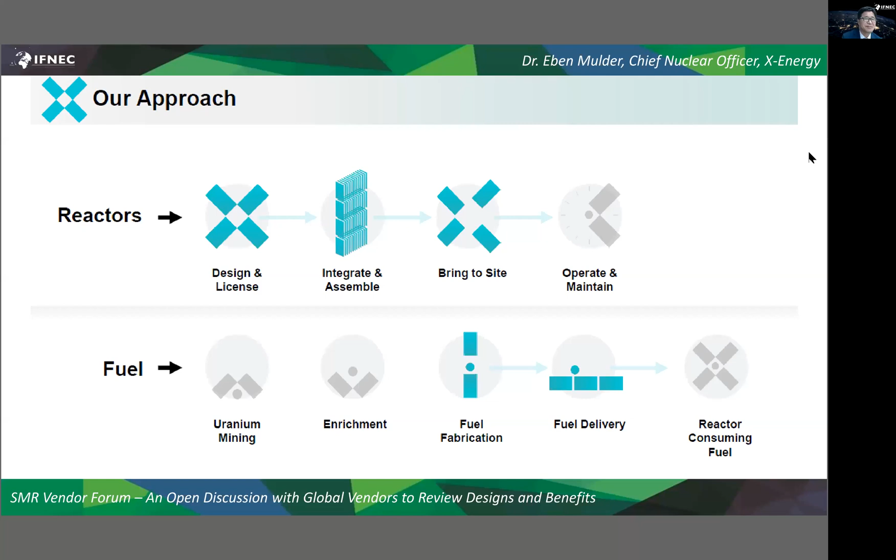So our solutions, in terms of reactors, are about proven design. First of all, there's 50+ years of research and test reactors that have been built. These reactors are designed for base load and also load following, and we can follow load within the power range of 100% to 40% and back again at 5% per minute. We look at grid scale down to mobile form factors. We also look at simplicity in design. Simplicity is what makes it cost effective at the end of the day and makes construction and regulation more predictable.

I think that's critical. It's also nearest to the Gen 4 market. We see that no research or material hurdles remain. Our commercial reactor products are in the design phase at the moment, and we have accelerated approval tracks within the US and Canada ongoing at the moment.

The safety of our systems are unprecedented in that it's a so-called true walkaway safe, where safety is purely guaranteed by physics and not by mechanical means or operator intervention.

We have very safe fuel, as you know. It's been mentioned that it cannot melt. It certainly cannot melt. Physically, it's impossible for graphite to melt. And no safety requirement for active cooling is ever necessary.

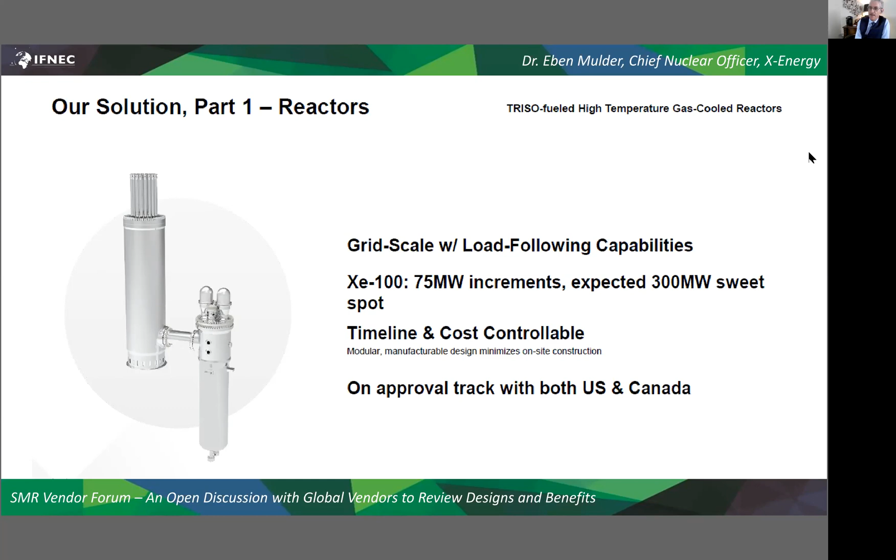In terms of our fuel, the DOE has been quoted as calling this the most robust nuclear fuel on Earth.

It's encapsulated fuel, TRISO fuel, self-contained meltdown-proof fuel, and offers the UCO form of fuel we are looking at. Because one oxygen molecule in UO2 is replaced by carbon, you don't have the interaction within the TRISO particles with the fission products, so you have a much lower pressure buildup. Therefore our burn-ups go as high as 165,000 megawatt days per ton.

Our product is TRISO-X, high quality, and we have improved our production efficiency, and in that way believe that we will be able to reduce our cost dramatically.

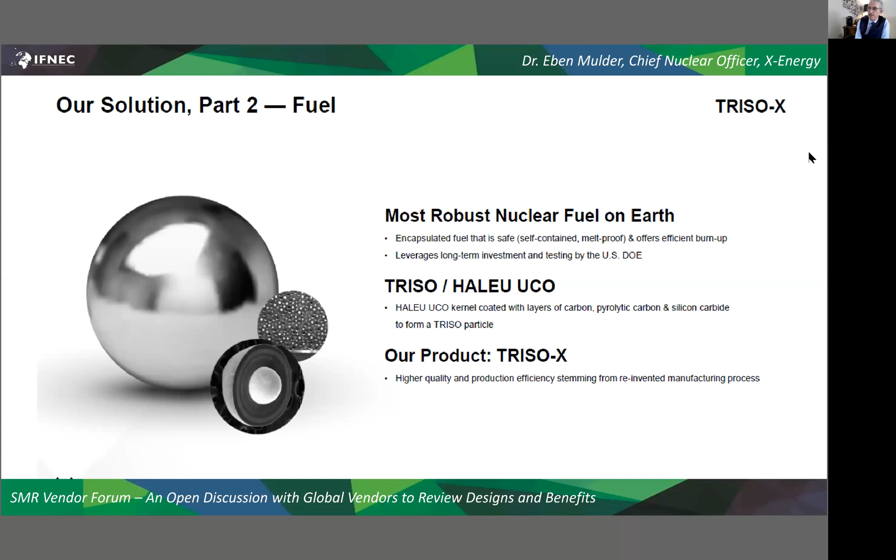So the XE100 leverages proven technology with novel integration. In fact, we have been leading edge for the past 70 years. Farrington Daniels in 1944 made his first proposal of the pebble bed reactor, at that time coupled to a direct cycle.

Then there was the Dragon reactor built, with 16 countries participating, in Winfrith in the UK. There were 2 experimental reactors built, one for prismatic block in the US, Peach Bottom, and a pebble bed in Germany. Then shortly after, 2 demonstration plants, one at Fort St. Vrain in Colorado, and in Germany, the thorium high temperature reactor.

As of late in 1998, Japan also built a prismatic block reactor, and as we know, China has built the HTR-10. In the US, there was a huge effort ongoing through the NGNP program, and we are leveraging that today in X-Energy. That's where our current position is, leveraging more than $700 million of US DOE investment so far.

So I will now talk about the technology. X-Energy didn't start from scratch. We indeed are building on the shoulders of giants, and we had the AVR in Germany, where I worked for quite some time.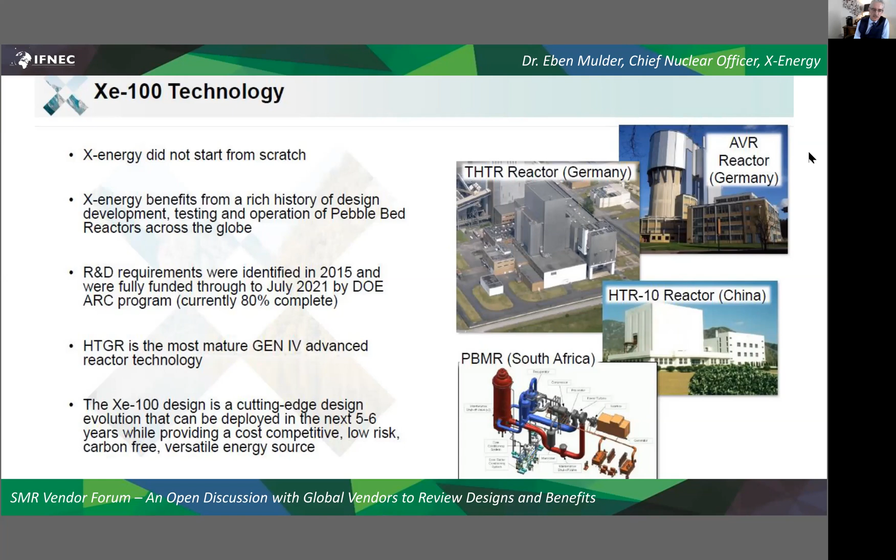So our design philosophy is actually very simple. We believe that any system that performs or contributes to support a safety function would be classified as a safety system or important to safety. X-Energy has ensured that all these safety functions can be performed using passive means. No power or operator intervention is required to ensure that fuel isn't damaged.

In fact, our preliminary classification of safety systems comes down to just 5 systems: first the TRISO-based fuel, which in itself has 6 independent radionuclide barriers, the RPV, the reactor building supporting the reactor, shutdown rods, and reactor protection system.

Then we have systems classified as non-safety related, but with special treatment. These are systems such as the burn-up measurement system, control rods during normal operation, the helium purification system, and fuel handling system. To the right, a depiction of the 4 control measures we look at in the design: control of criticality, control of heat removal, control of the containment of radionuclides, and maintaining the core geometry.

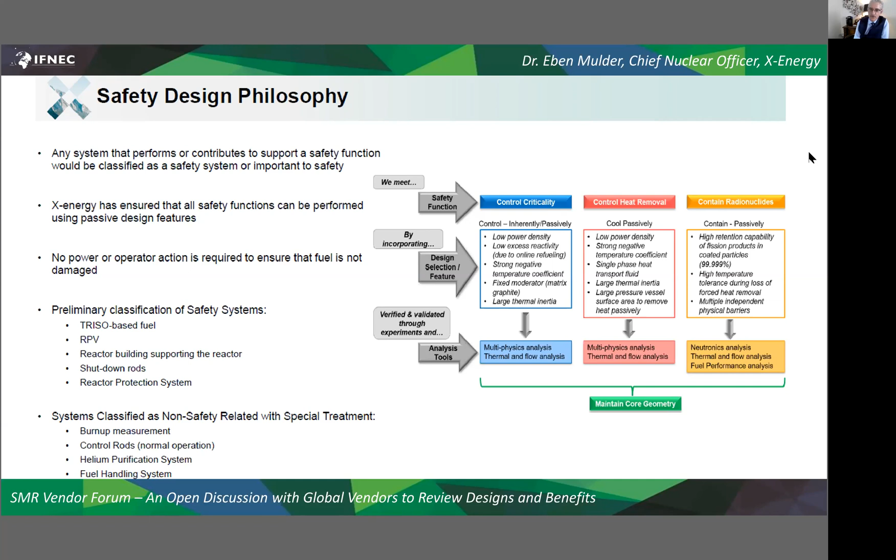As mentioned, the reactor is a well-proven system, derived over 50 years of design work, with proven technology in terms of the US fuel. A lot of money has been invested there. We've been very blessed in the US that X-Energy itself has won quite a number of awards, I think the most of all the advanced reactors. Our design is pretty conservative and doesn't require new materials development in our code cases. The steam pressure and temperature design will provide steam from multiple off-the-shelf systems, and we try to keep that as simple as possible.

Next slide, please. You will just here see a depiction of the nuclear island and conventional island, where the nuclear island on the left will be the system that we would like to have licensed.

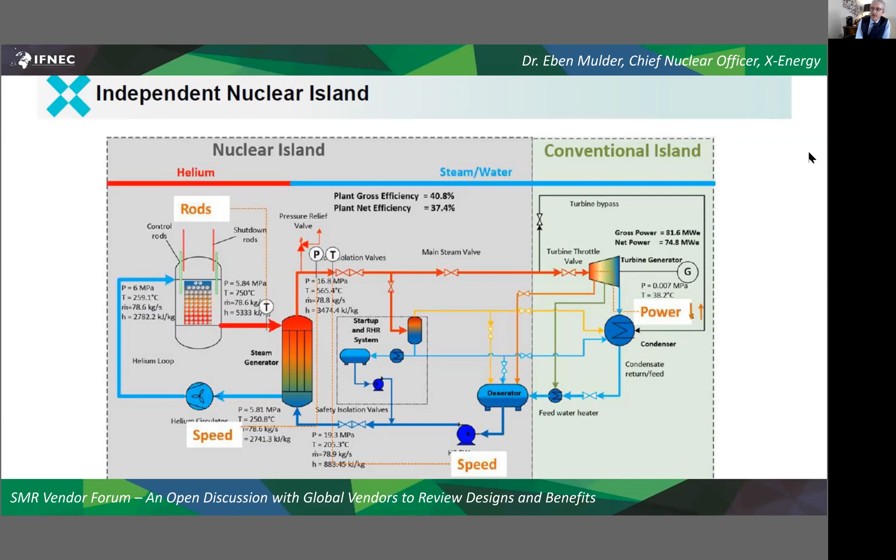Next slide. The design of the reactor is such that the primary shutdown mechanism will be a strong negative temperature coefficient over the entire operational range. That has been proven on several reactors, including the HTR-10 and the AVR in Germany. The secondary diverse shutdown system is comprised of 9 shutdown rods inserted into channels in the side reflector for shutting down the reactor. Control rods also provide a third independent means to shut down the reactor.

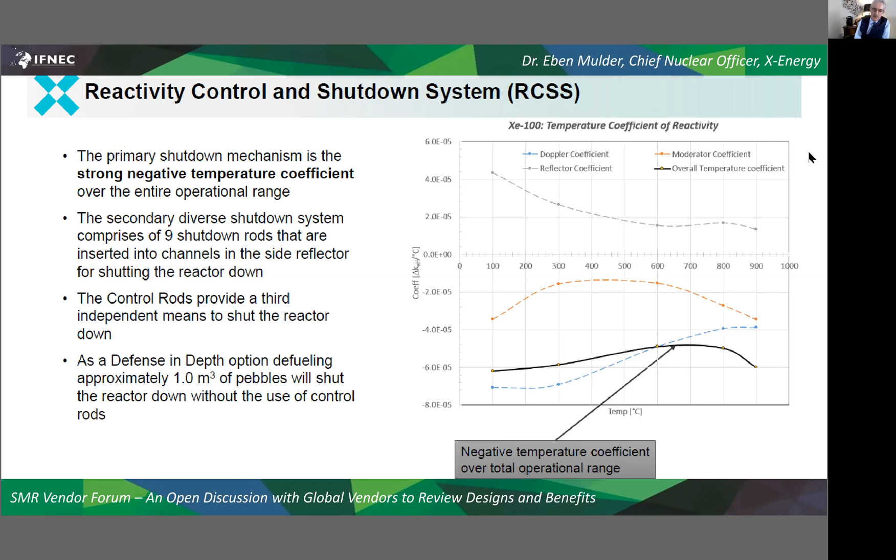And as defense in depth, because of continuous fueling of this reactor, you have a very low excess reactivity, meaning that just by defueling about 1 cubic meter of pebbles, that's about 5,400 pebbles, one would render the reactor subcritical long term.

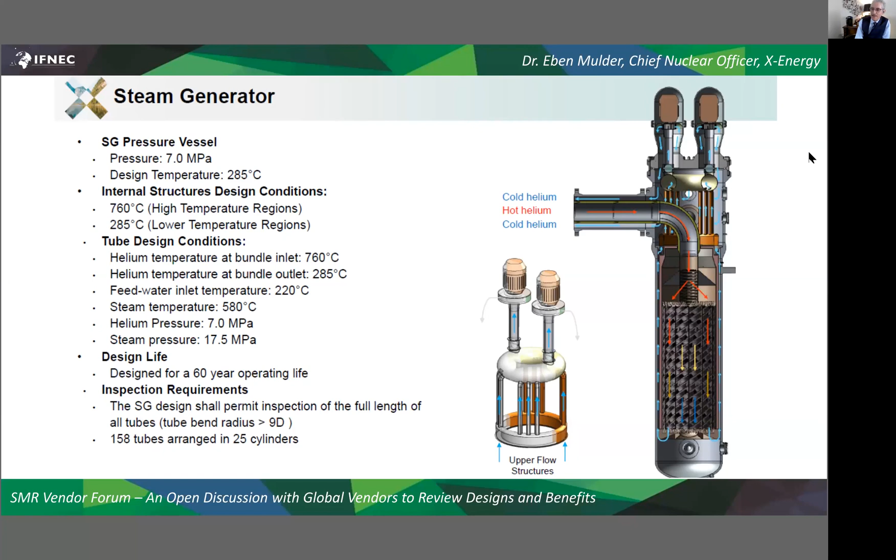Next slide, please. Just to show the control systems: 4 systems - distributed control system, investment protection, reactor protection, and post-event monitoring system. Next slide, please.

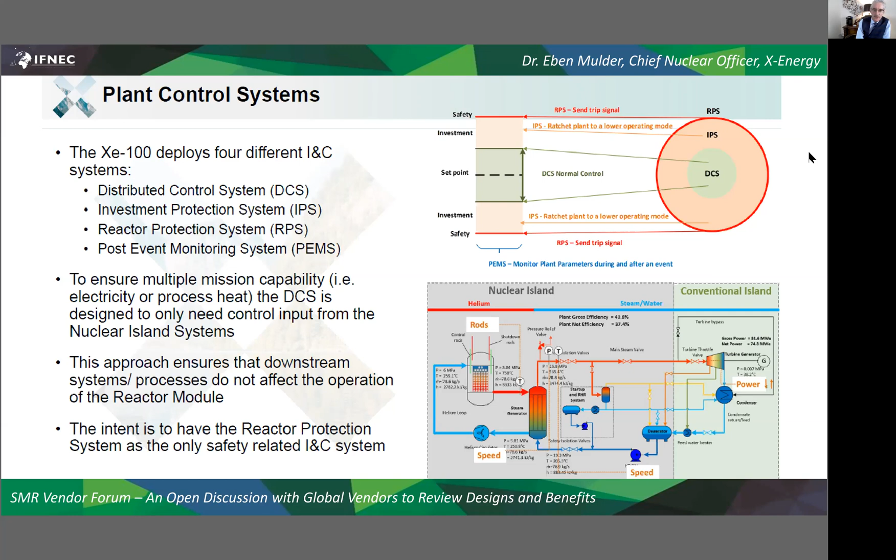We are well advanced in terms of our training simulator for human factors engineering. We currently have completed phases 1 and 2, and we start with phase 3, planned for completion within December 2022. The Flownex code is a first principles basic physics code used and connected directly to the engineering simulator.

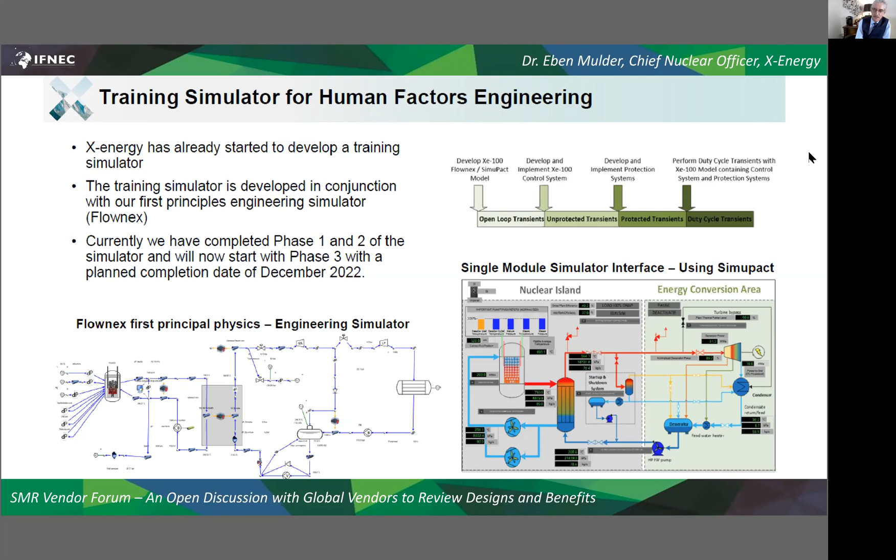And in our company, we've got key personnel that have been part of the US and international HTR community for more than 30 years, working together on the XE-100 in the past 10 years. I think this ensures our ability to meet all milestones. Thank you very much for your attention.